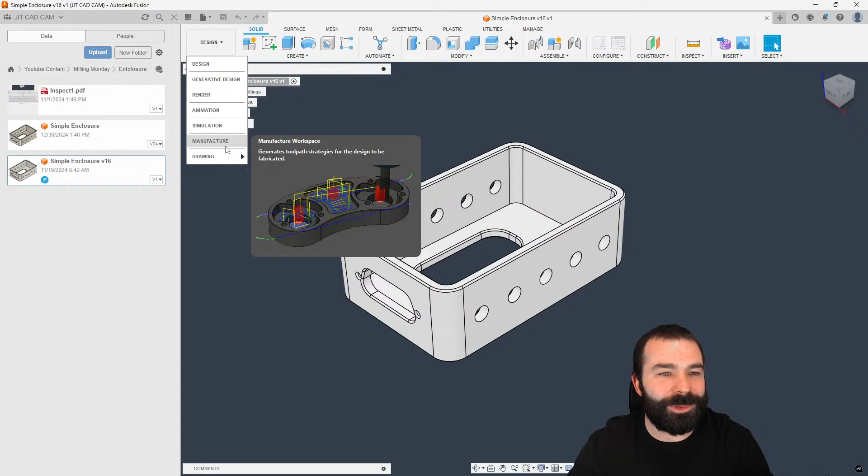Here we go. Now, question is numbering your tools when you're actually creating your tool path. So let's do a setup here real quick and throw a couple of tools at this. As always, we got to wait a moment.

First time I've started up Fusion's setup side of things. So let's give this some tool paths. And we're going to go with the good old standard.

So there's a couple of things I'll point out before I jump into this too far, Deep Thinker. And what that is, one is I built out a shop crib. And the shop crib is the way that I tell most people to go at the end of the day. Is you can have, of course, libraries of your machines, or you could have, again, a shop crib folder.

Now, I would recommend that you do the shop crib folder and then put another shop crib inside of it. Again, to me, it's easier to go and reference everything quickly based on those selections, of course.

But as you can see right now, if I go to my VF2, my face mill is in pocket 10. So based on that information, it makes it very easy for me to go out and grab these tools. As you can see here, I was very easily able to go in and face off this part.

If I go back in, let's hit this with an adaptive clearing now. I am just going to recycle the good old 1/2-inch end mill. And then as you guys are going to see, this is going to wrap up this part pretty quick.

Let's say we're going to do, I'm going to do this the wrong way, just so you guys can see, is 3D contour. Again, we're going to grab another tool. Let's say it's that 1/2-inch ball, right?

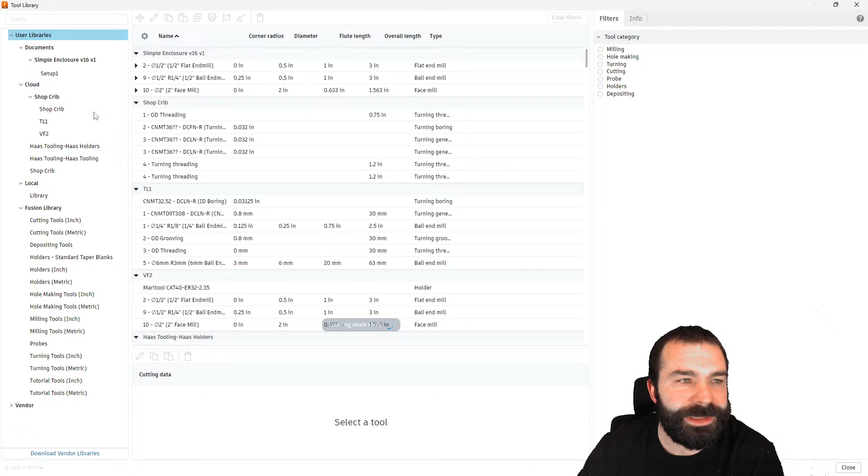So if I go to my tool library, up here at the top left, you'll see I'm currently working inside that enclosure file, where my setup tools reside. Now there's the ability to auto number your tools, and with auto numbering it shows you what it's changing from and to, similar to parameter settings. If I wanted to go up by 2s, or by 10 in this case, it automatically tells you how to renumber, but it uses a continuous one-after-another change, so it's a bit more manual if you want a specific tool number.

You have to come in, right click, and edit that specific tool. The good news is, a few weeks ago we talked about this with Autodesk, I can change the tool number here. Let's say we make this 19 now. I've only changed this inside this specific part file, because there's no linking between my tool pulled from my cloud library and the changes made at the part level. This is something I think Autodesk saw, though I don't know what they'll do with that information. As you're seeing, I have to manually come in and change this in my library, because I'd need to change it not only here but also at my VF2 machine. Or, if I want to keep track of everything, I can copy that tool, go to the VF2, and paste it back in so I have the latest version. Again, I'd have to go in and delete any other tools. This is why I prefer the shop crib method, or building a machine library.

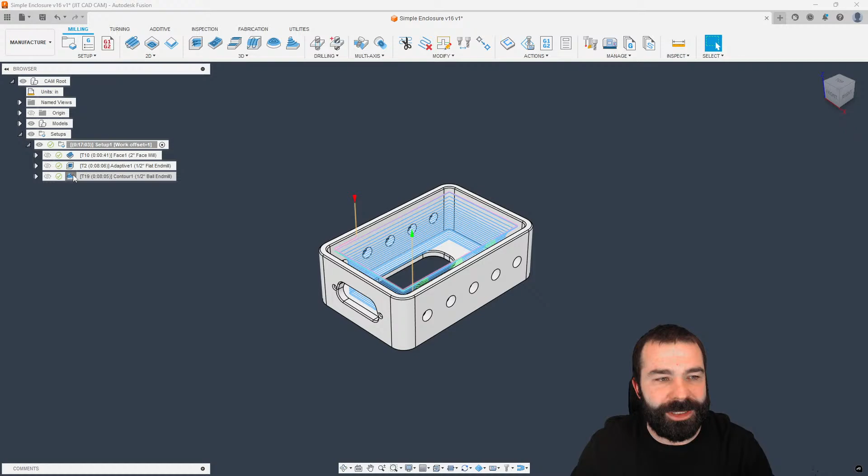Another way you could edit your tools is to go to that operation, right-click, edit tool, then jump over to post-processor. Let's bump this up to 29 now. What that's going to do, when we go into our tool library over here - sorry, tool library, not post library - is show that it's tool 29 at the file level. Again, it hasn't pushed back and updated anything in my standardized library. So there really is no good way to update tool numbers quickly. I don't know if you can do a compare and edit, but let's take a look.

As you'll see here, with tool number in the tool library, you can't actually update either with the compare and edit. This would be a good feature request for Autodesk - if there was a way to bulk update at this menu and push that information back and forth, that would be handy. But it could also get you in trouble if you changed from 29 back to 19, but the work offset 29 stays the same. So Deep Thinker, I hope that helps you out a little bit.

I'm going to go ahead and - or was that Deep Thinker? That was Deep Thinker. Awesome.

Deep Thinker, I hope this helps out a little bit on how to organize your libraries so you can have consumable or rotating tools versus your standardized tooling. Depending on your machines, I've always started to use - in the case of a Haas machine or a Fanuc, you have 200 tool offsets. I tend to always place the same tool in the same tool number, and then I have a standard 200 tool library, and I'll just swap out the pocket number at the machine to make it work.

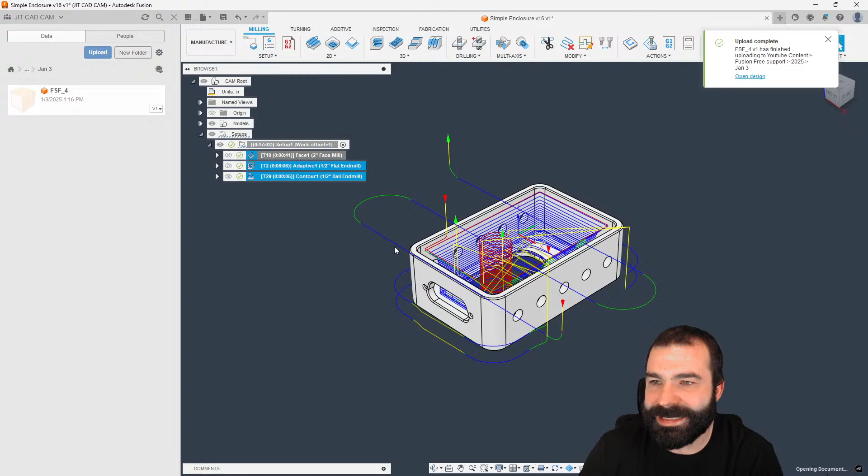So let's go ahead and get this file opened up and see what he's talking about. So I know he is using that lovely thing called millimeters, but we won't let that affect him too badly. But it looks like he's got a couple of surfaces. Are the purple surfaces or the orange surfaces you're looking to machine down?

Orange surfaces. So there's a couple of ways, and I have actually had to do molds like this a lot. The old school way of doing something like this would be if I go in and, let's say, I'm finishing up these floors with a scallop toolpath. So if I go 3D and I go to my scallop...

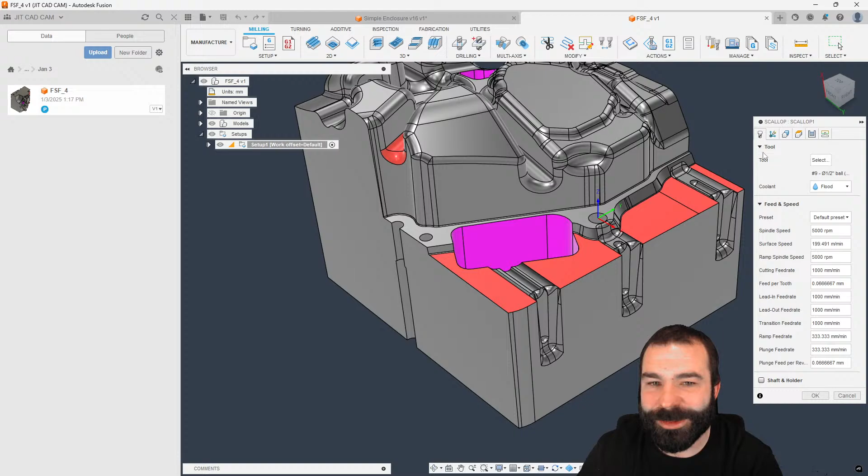Again, we're going to go grab my lovely ball end mill. Now, for a lot of you guys out there, millimeters versus inches really doesn't matter. I actually recently saw a really good video talking about that, because really you can program almost any machine in one or the other and your G code can be translated. We'll take a look at that here in a minute.

I'm just going to do this first landing, of course. And what we want is we always want to get a toolpath on our part, right? So 0.5 millimeters should be a pretty small amount. And as you can see now, we're machining on that surface. Yes, I know we're going up here on the top a little bit. We could, of course, fix that by changing our contact point boundary, things of that nature.

But if I wanted to machine that surface down, in his case 2 millimeters, I could go to stock to leave, and then based on my axial, I could say -2, while my radial stays at 0, right? So this is a cheap way. As you're going to see now, that toolpath has been dropped completely by 2 millimeters.

So again, we could change our containment, of course. We could fix this edge so that we don't touch that wall, all of that. But by using the stock to leave and dropping it by 2 millimeters, I've simply gone in and achieved what I wanted.

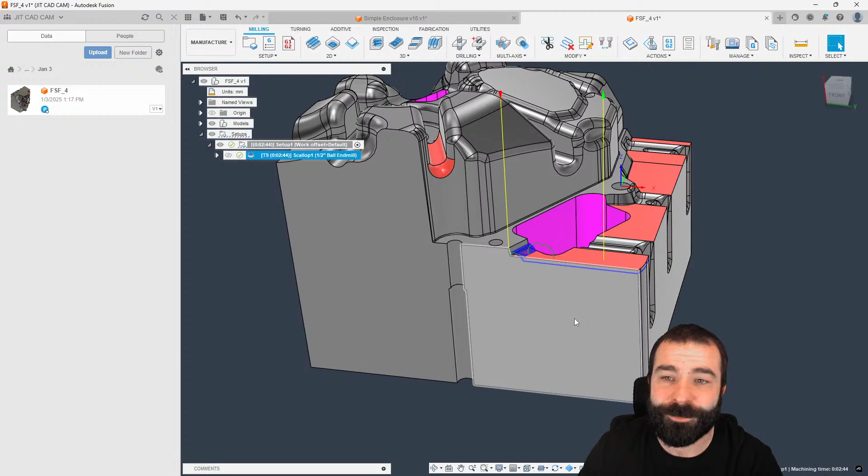Now, another way you guys could approach something like this is I'm going to go ahead and jump over to the design side of things. Now, this is an extremely complex surface, all the modeling that's happened here, so this may or may not work.

But what I'm going to do is copy and paste my body, and I'm going to leave it right where it sits. Yes, for anybody out there, setting this up with components would be your best friend. In this case, we're going to move a little quick here, but as you can see, I now have my 2 bodies. I don't have a timeline, so I want to make sure we turn on that timeline. And now I'm going to modify one of these.

Now, again, I can use something like the press pull tool, and this is where we're going to find out how well this is going to work. But as you're going to be able to see, if I pull down on that surface, I am getting that surface to move, and it is carrying that fillet with it.

Now my computer is locked up temporarily. The Fusion is doing some thinking on how it can reconstruct the surface, because the problem is going to rely on all these other surfaces working and being able to be repaired automatically, right?

So in the case of this part, as you can see, I was able to pull that down 2 millimeters. Now keep in mind, it is pulling down everything else with it, so I do have to be aware of that. So we're going to go ahead and hit OK.

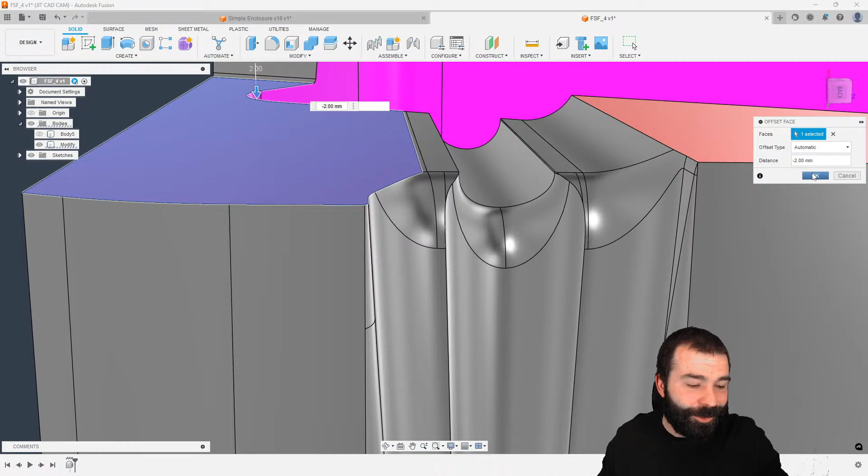To make our life easy, I'm going to compare those two bodies to see what works and what doesn't work. In the meantime, we're going to let Fusion think, because if there's any tip I could give anyone, it's that when it gets stuck like this, if you get click happy, you could actually crash the system and cause a lot of problems.

So it doesn't work on all surfaces, correct. With it not working on all surfaces, we'd actually have to do quite a bit of modeling. But as you're seeing here, I'm going to change the opacity. Now you guys can see I did get away with pulling one surface down so I could remove that area. So in some ways you can get away with something as simple as using that push-pull tool.

Now he's saying it's not necessarily going to work for all surfaces, which is true, which means we might have to take a more traditional approach where I could do something like an extrude and physically cut down that surface.

Another thing you could do that I think a lot of people overlook is you have the ability to go in and do a surface. So now I could go in and do an offset surface. For example, I want to use this area right here.

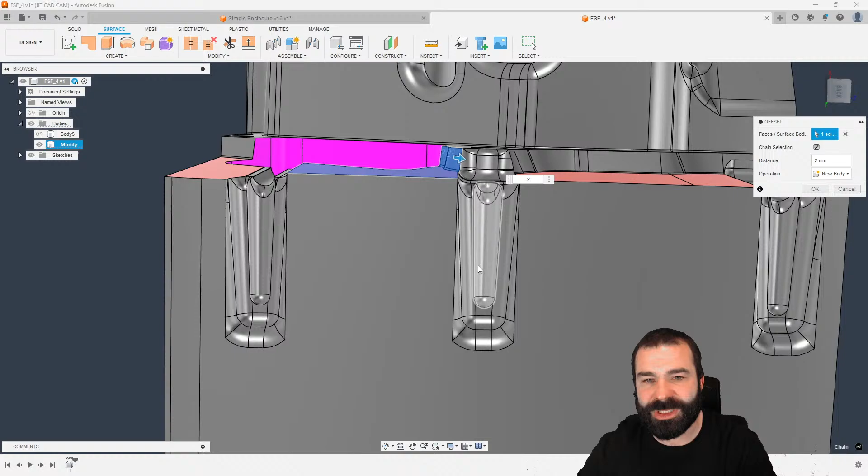Now notice how we're going to grab everything. So just being safe here, if I say -2, let's get this model out of the way. What you're seeing is that blue hue across my screen versus that surface that we've offset. Again, because we've taken all of those surfaces and they are chain selected, it's also doing that backside, which according to his coloring, he did not want to change, right?

So let's go back and do that offset surface again. This time we turn off chaining. I grab that surface, and again I can pull it down by -2. If I get my model out of the way, you guys can see where I'm pulling that down very easily and moving it.

Now there are a few other ways you can get away with this, and again I just want to get this to a point where you guys can see what's going on in the background. There we go. So you can see I created that offset surface. I pulled it down, and again it's going to create a shell expanding in both X, Y, and Z from that surface.

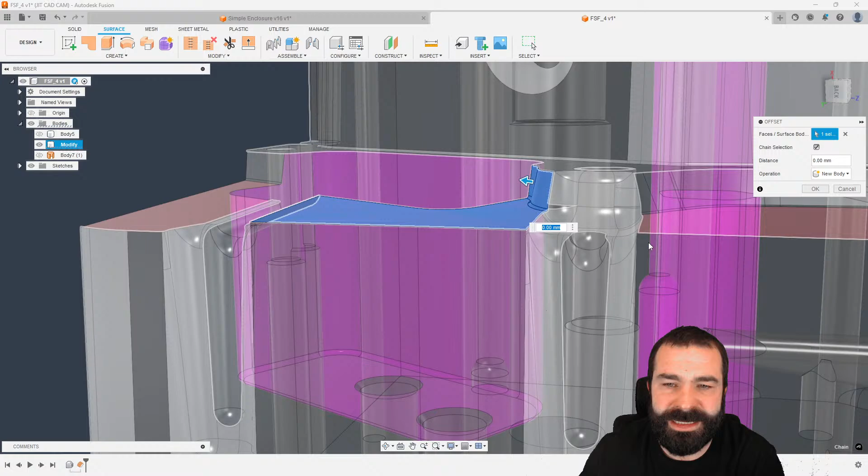Now another way you could use offset surface is you have the ability to do an offset of 0. So if I grab all of these surfaces, in this case I'm going to leave them at 0, and then I could do a move, and move that based on my Z-axis down -2, or whatever he's trying to achieve, right?

So again, as you're seeing, I'm taking everything down with it for machining purposes. Again, I do still have a little bit of an issue here where based on the boundary I'm working with, he wants to drop everything. I assume you're trying to drop everything down and out to continue to follow these surfaces, right?

I'll give you a second to answer. But again, we could do quite a bit with these tools as you guys are seeing here. So if I go back one more time, offset this whole thing as is, I'm going to turn off the body. And now we might actually just try to reconstruct some of this stuff, right?

So this is where we would use something like unstitch everything. Again, we can now do something like an extend. I want to extend certain edges down a certain amount. Again, this is just a completely different workflow than I think some people think of inside the software, right?

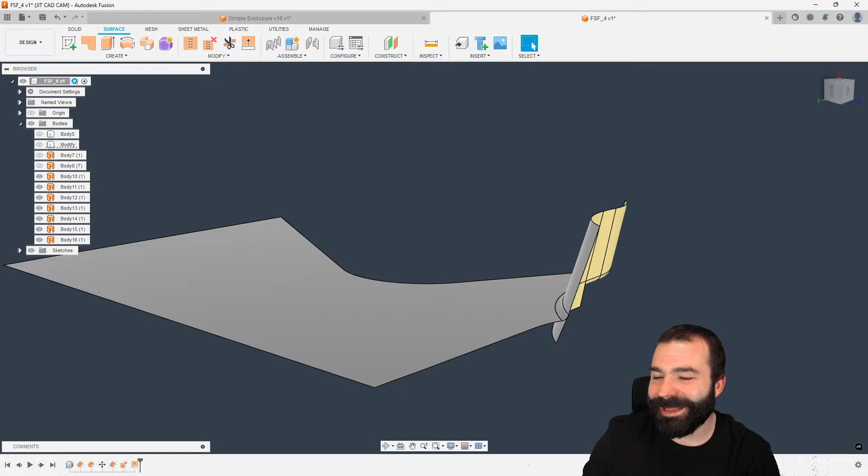Yeah, right. So I mean, I know what happened. Somebody either smashed this mold or somebody called in the ability to go and modify it, right? But as you're seeing, using surface tools, you have some different things going on where you can continue to take those shapes and modify them.

And again, extend surfaces. So even though I did all of this pointless work, as I'm pretty sure he said in chat, we could take this and machine it down, not so much worry about these other areas because it's all going to get welded back up. And then I assume he's going to remachine it back to zero. So it's still the same outcome.

I would say the easiest way, if you can get away with it, is the ability to use stock to leave. And what you're seeing is this toolpath sits on the part right now because we have the original part turned off, and now you guys can see that toolpath.

But using stock to leave could be your best friend, very much so, if you're just trying to get something out of here. I do have some content I'm going to do at a later date based on casting type scenarios, but it's still back to the same, so you guys know you can see how I have two different models playing around here.

So if you were doing a casting, or want a little sneak peek, let's say for example my part that we're machining here is actually going to be that modified part. And now my stock is going to be based on a solid, which is that original part. Now I would have two models, right? One would be the casting, one would be the manufactured part.

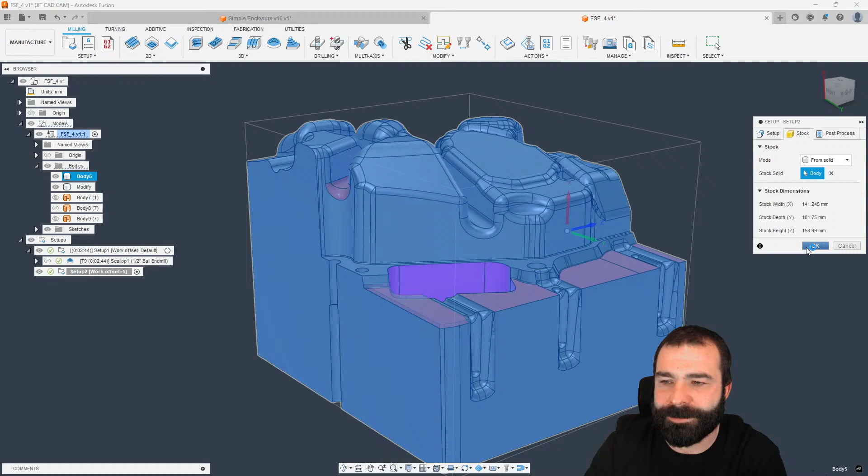But since we've set that up now, this little corner here has become my stock. And since it's my stock, if you were to go into your 3D toolpaths and do something like adaptive clearing, the rest machining is going to pick up on remaining stock, also previous operations. You could also do something based on a from-setup-stock scenario.

So again, let's go out and use standard tools on a metric part. Nothing's going to make the machining world hate me more than this today, right? But again, based on the rest machining settings of your Fusion and how you use them, it will auto recognize where it can and cannot machine.

It's thinking long and hard about this, so we'll give this a few minutes to think about what it needs to do. And in this case, I got an error message. Always, of course. Let's go ahead and change that rest machining setting. We're going to go from setup stock and let's see if it gets us what we need.

But as you're going to be able to see, we're going to get that two model comparison. Again, what needs to be machined versus what is machined, type of scenario. In the meantime, I see a few other questions come in while this is loading.

Fanuc mill post. Change the tool call out. Okay, so you want tool change to be T1 M6 in brackets, and then you want N30. Is the N numbers what your post is giving you? So you would like the tool number M6, and then the next tool call out to be also in brackets, as I'm seeing.

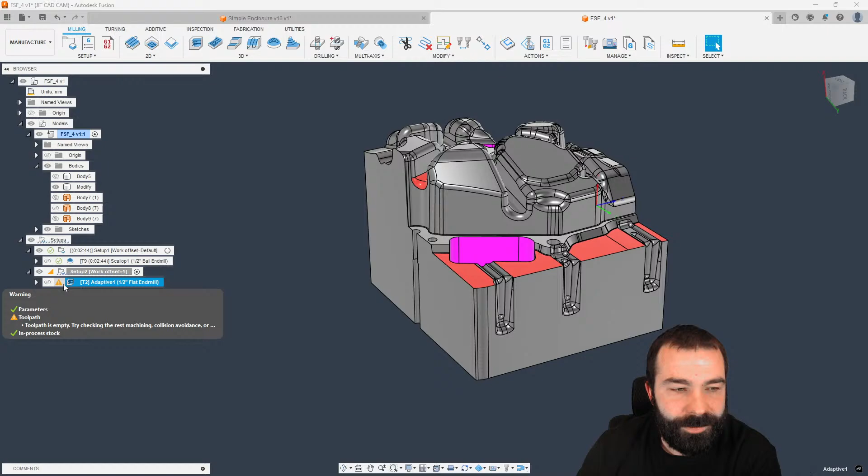Collision avoidance getting us, as always. Let's go ahead and see what's going on. I need to get an idea of how big that tool is in comparison to my part, right? Let's go ahead and show tool. There's my tool. Obviously we're not going to be able to machine on the right.

Hey guys, there we go. Screw up number 2. That deserves a drink, right? We need a tally board.

I swear, hold on, I'm going to scroll down. All right, so nobody in chat was out there hassling me that I had my Z-axis the wrong way. So in some ways I'm glad you guys didn't recognize it, and I did. In other ways, bad on you guys for not helping me out here.

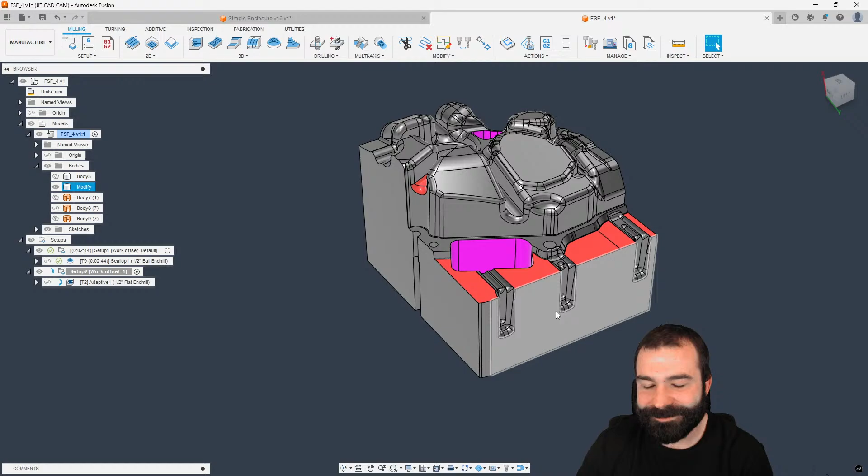Let's see if we get that toolpath to work right this time. We're going to go ahead and regenerate one more time while that sits. And we're going to go ahead and need a Fanuc mill post. Sure thing.

Mads Camper out there, and you know what we can do? I can pull this up at the same time.

I'm just pulling out a Fanuc post from online so that we can make those changes. Fusion is still thinking, so let's go ahead and pull up Visual Studio Code.

And Mads Camper, are you still out there? I want to make sure I'm understanding the way you want this modified. It looks like you want M6 in brackets and then the T3 in brackets for the pre-call.

So what I'm going to do is, one, I have my Fanuc post opened up. You want to make sure that you have the Autodesk Fusion Post Processor Utility installed. This will help you a lot with changes. What it allows you to do is go in and do a CNC selection. In this case, this is for milling.

And I am just going to go to what's called tool change, right? And the reason why I'm using tool change is because, as you can see, I'm now getting that T1 M6 on line 30. And then I'm getting my T2 callout on N35, as he's put in chat for you guys to see. So what I'm going to do is click, and what you're seeing is it's write tool call, tool, comma, insert tool call. So that insert tool call is the actual M6 in this case.

So if testing that, what I'm going to do is delete insert tool call. I'm going to hit Control S. And what you're noticing is it's now got rid of it altogether. So yours truly has actually removed the entire tool call. So I'm going to undo what we've done and hit save. And as you're going to see, it's come back now.

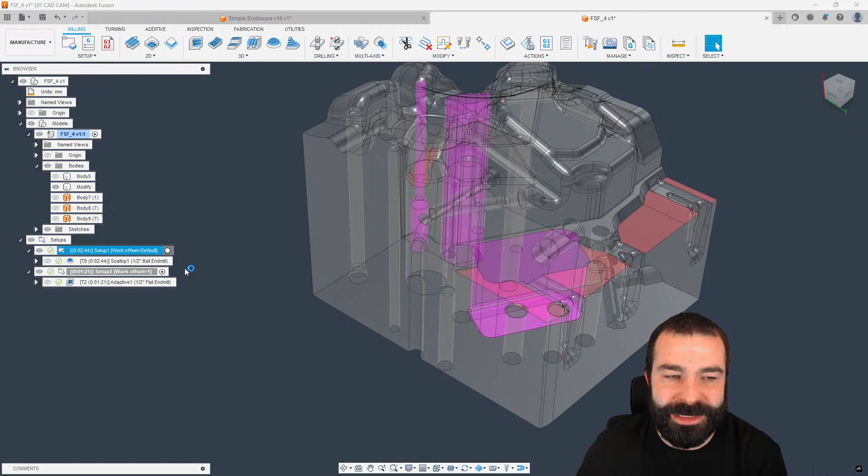Cool. So we can stay with this part in this case. We're going to go ahead and set up to do our inspection routine. First, I'm going to jump back to design real quick and change my opacity.

Here's a pro tip for you. Can you change opacity in manufacture? No, you cannot. That's kind of painful.

It'd be nice, right? So let's do an inspection. And what he's asking about is the import inspection results, right? So what I'm going to do is, what we need to do before we import results, we need to create inspection results. Well, your inspection results can be a couple of different things.

Now, you have what's called probe geometry, which is an in-process inspection. Again, tight tolerance bores, maybe keyways, things like that, right? I like to think of it as a single feature kind of probing routine.

Now, inspect surface is the one that we're looking at that's going to give you a much deeper inspection upon your part, right? So I say it's comparable to a CMM, but for all of you out there, before you hassle me, it's not going to give you GD&T data.

However, bullet point here, Autodesk, can we get it to do GD&T data? Please, it would be amazing, right?

So let's go out and get our probe. This is the one tool I think that is in my machine that is metric, because it has a 6mm jewel on it, as all these guys are going to hassle us about. But what I need to do is I need to set my points to actually measure, right?

So now this is a good example. Let's say, for example, Bogdan is going to machine this part, right? And he may have actually forgot about surface here, or he's over machined the surface. Now, you can go in and you can set your tolerancing of those surfaces.

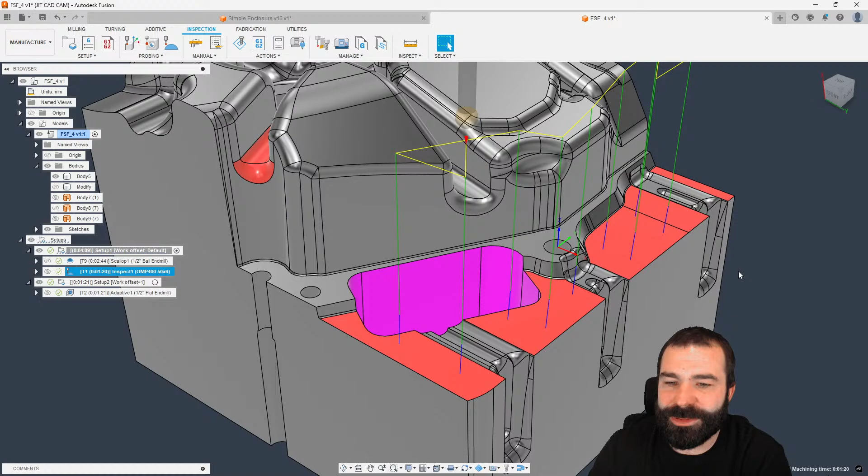So what I'm going to do is I'm now going to generate this inspection results. Normally, you would post this out and you would go run this on your machine. So I think I have to do some post here. Awesome, we post this out.

It's failed, of course. Why did it fail? Work coordinates 0. Okay, got to fix that real quick.

We're going to go ahead and make sure I never do this again. I recommend everybody does this. Set this to 1 and then go ahead and right click, save as user default. Now, every time you make a setup, it'll always start with 1.

But let's go ahead and post this out. So I'm posting this out to show you guys what your machine would want to run. Probe on command, of course, because FANUC needs probe on and probe off. We're going to go ahead and switch out to a Haas post.

But let's go ahead and let's see here. Actually, probing and inspection - we'll have to fix that later. This was a post I was doing some testing on. So we have our, let's go to the default library, as you guys know.

Haas inspection, right? We don't want pre-NGC, next gen control inspect surface. So one thing is you want to make sure that you're getting a post with the inspection capabilities and the inspect surface. This will be very handy for you at the end of the day.

So we're going to base this in the free support Friday. Don't use post library because this is where I usually butcher things. Let's go ahead and post out now what should be known good G code. So this is the way the actual Haas post is going to spit this out. But what it's doing is it's deprinting, sending things to the parameters, writing things to a file if you're doing so. This is the code to run the machine, right? And what it's doing is plotting points. That's all it's doing. It's not real crazy at the end of the day.

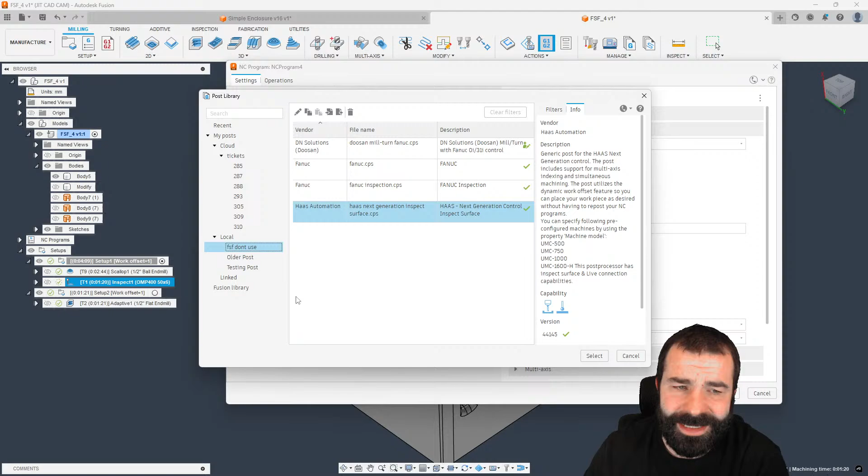But if I go ahead and come back and post this a second time, and everybody has access to this, I don't know about the hobbyist license, but there's actually a post for generating inspection results, right? Now what you're seeing is I'm going to the Autodesk library of posts, and then you'll see there's a results file generator for probing, right? And what this is going to do is generate results based on a deviation, right?

So what we're going to do is go ahead and hit post. This file, got to make this clear to you guys, is the file that your machine would have created, right? So I've shown you the G code to take to the machine. This is actually the G code you're going to remove from the machine, right? So these are all the points that we've actually plotted in space on our part, right?

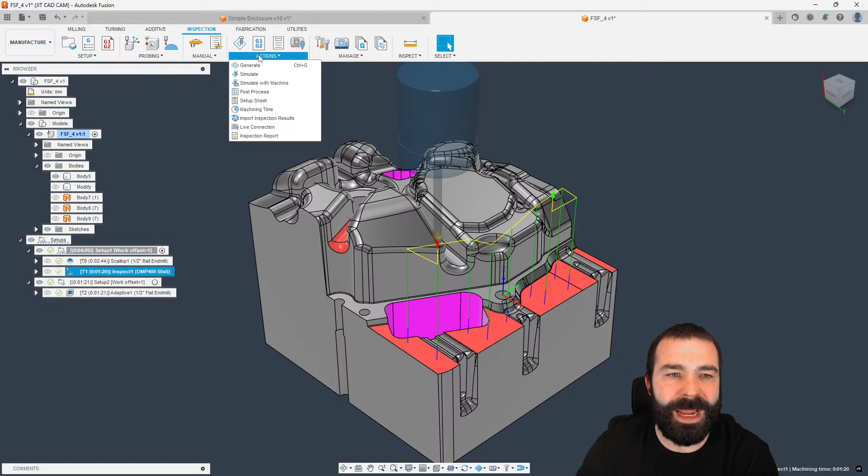So with that, I need to import those inspection results. We're going to go ahead and go to inspection now. I'm going to do my action, and we're going to hit import inspection results. Now I need to select that file that we've generated, which means I need to go chase down where that file is. I believe it fell under NC program.

Let's see here. We might have to repost it to somewhere where I know where it is. Let's do that one more time. Post process. Let's just put it on my desktop so it's easier to grab, right? There we go. There's our results.

Import inspection results. Again, guys, I can't stress this enough. One, you could do this if you have the post that's in the default library, but two, this is the file you would pull from your machine, right? So what you're seeing here, before I go through and start messing with anything, is this is the results. This is what we got back, right? So as you're seeing, all of those surfaces are considered good.

Now they're considered good because of the settings of that post I used to make the results. But you can now validate and see those results, see how much you're deviating. What is the deviation? What is the problem with those actual points in space, right?

So you could also create what's called an inspection report if your customer is looking for something. Again, this inspect surface is the key element when you go in and actually do anything from here, like part alignment, stuff of that nature, right? So as you're seeing here as I'm pulling up the inspection report, again, that inspection report is going to be a view capture of what you were looking at when you created it, as well as a list of all those data points for your customer.

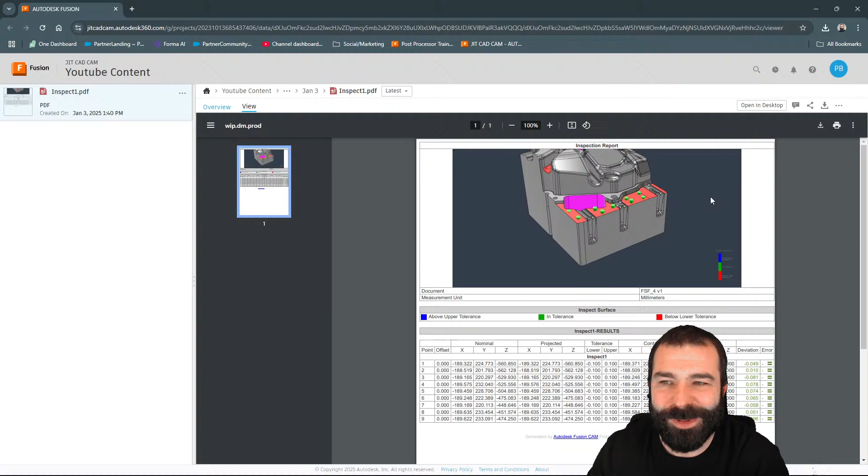Now, again, since we've actually done that inspection, we have that ability to do a part alignment as well. So if we wanted to do a part alignment, we need results. We've already created those results, right? So I can go ahead and bring in those results right here. And what I'm going to do is hit OK. And what this is going to do is now generate an alignment, right?

So we've already posted for alignment, which means you would post G code. We can then import our inspection results. We've already done that. We can show the alignment information, which means it's going to transform or shift our part. These are all in millimeters, guys. And it's going to rotate all of our G code.

So it's adjusting the G code to the part. That's the thing I think a lot of people don't understand - part alignment is adjusting the G code. It's not doing a plane shift at the controller. It's not moving the planes or anything there. We're doing that all with the G code coming out of Fusion.

So what this would mean is what would normally be a straight line in X is now an angular line in X, Y - technically it's only in the YZ plane that it shifted, right? So when that G code comes out, it's going to look night and day difference. But once you get those inspection results imported, there's a lot of things you can do with it.

I do see Discord just jumped up. I see one of our all-time viewers, Travis, is sending me a photo. I kind of see what he's going for now that he's talked about it. He was asking about threading and clocking threads inside of Fusion, which is a little tricky, but let me get back over here so I can see you guys in chat. Travis is finally here, yeah I see that Travis. Does anybody else have any other questions in the meantime? I do see my phone is also going off with notifications.

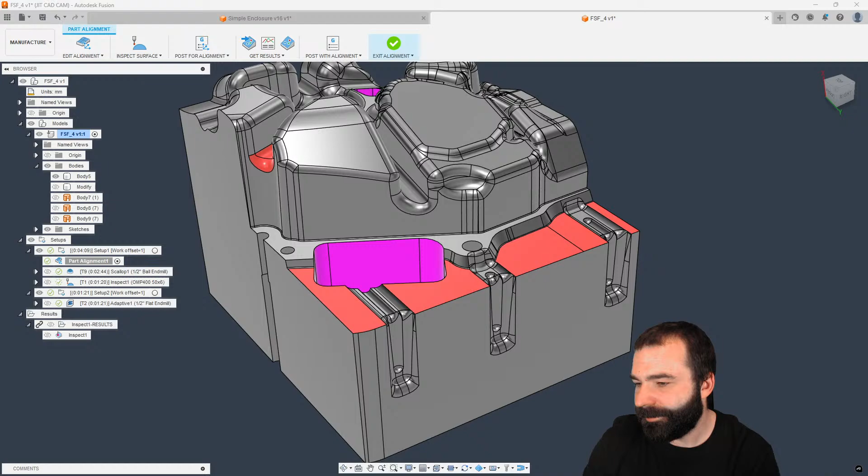So Travis was asking about clocking his thread, but I assume it's the starting of the first thread is what he's asking about, right Travis? Where and how can you define the start of the first thread inside of Fusion? Guess I should pull up my chat so I can make sure I know everybody's out there.

So he's doing this with milling. I'm going to go ahead and just create a simple part for doing this. Actually, I think we have something that'll work here, right? Go ahead and flip our Z, angle all my tool paths. Oh, do that one more time. Flip it back the other way. There we go.

And we sure don't need 3D on the outside of this part. So I just did this to rough out the part for stock purposes.

So what I'm going to do is I'm going to do a 2D thread cycle. Now there is what's called a start angle, and this is where you would need to define where that's going to be based on the part. So I'm going to give this a very generic little thread mill. I don't think there is a default thread mill, is there?

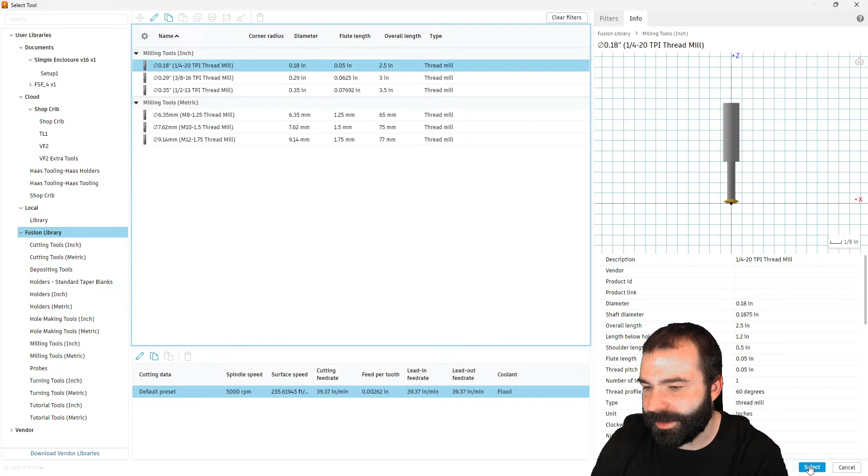Where is it, thread mill. Tiny little guy, 1/4-20, right? Perfect, surface that we're going to machine. And so what you're seeing right now is we are currently starting over here on the left as we do our milling in and out of this part.

I see something about a copy and paste. Do it with a copy and paste of thread. I was curious how to do it with milling. Maybe I don't fully understand your question, Travis.

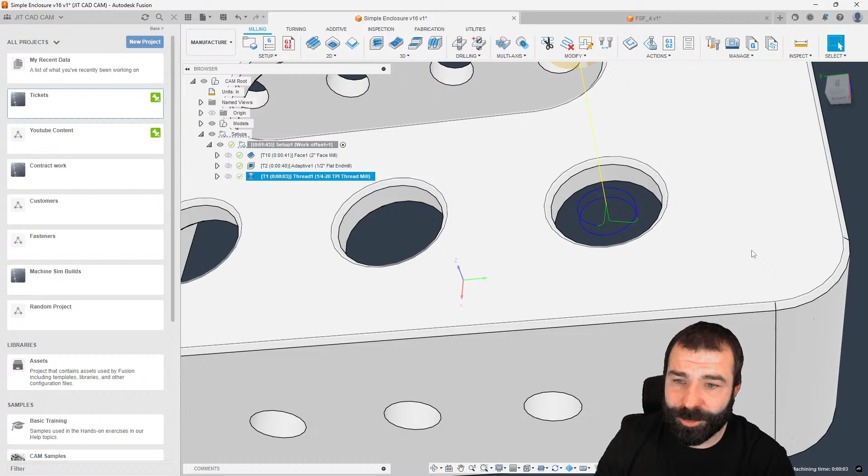As you can see, I can clock that thread start by using my start angle to adjust it, right? So again, as when we were at 0, we're at 120. As you can see, we could rotate that around in any way, shape, or form. Now you could also do things like multiple threads here if you guys didn't know, which means we're going to do a double lead thread.

Ah, I see. Okay, so you're talking about... Okay.

So what Travis is referring to—I'll need a lathe part for this, of course—is he's trying to do thread chasing with a live tool after he's gone in and done something with a turning tool, as if he sent a part to heat treating, right?

So there's no real good way to do this in Fusion as it sits at this day. Now, if you knew where your threads were starting on a part, you could obviously get away with some things. But here's my part, again we have our inside type work. What he's referring to is if he was doing inside threading. I think I have a threading tool up—ID threading, OD threading, ID grooving. I'd have to make an ID threading tool here real quick.

That's all right, we could throw one together. Thread... where is it here? My brain's just not working. Jumping back from mill into lathe all the time gets me every time.

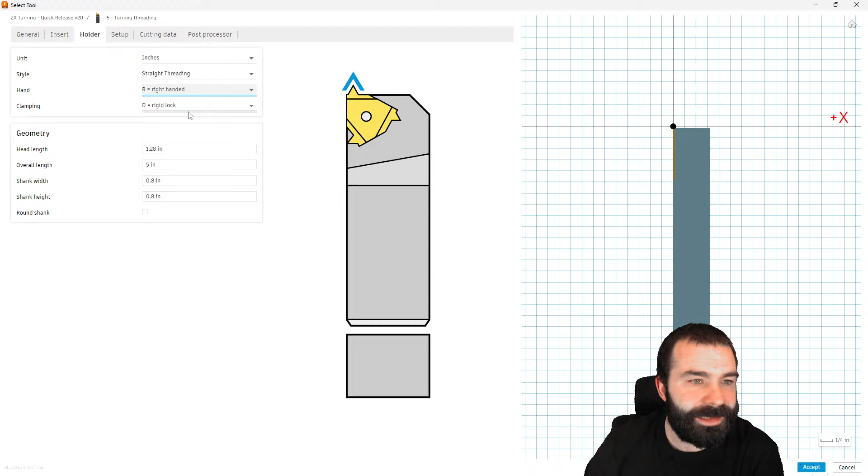Right-handed, straight threading, inch. Where is the—am I thinking wrong? Inside versus outside?

Yeah, I know, I keep telling you guys got to give me content for the mill turn Thursdays. Am I? There it is. Internal thread—see, I'm not crazy. Thought I was crazy. I'm not crazy.

Yeah, we got to fix that tool. I broke that pretty badly.

Head length is going to be 1. Am I also doing this wrong? Somebody tell me. Wouldn't surprise me anymore, I do a lot of things wrong. Yeah, I did it quite wrong.

Yours truly's tool is way too much. I've come accustomed to you guys making fun of me all the time.

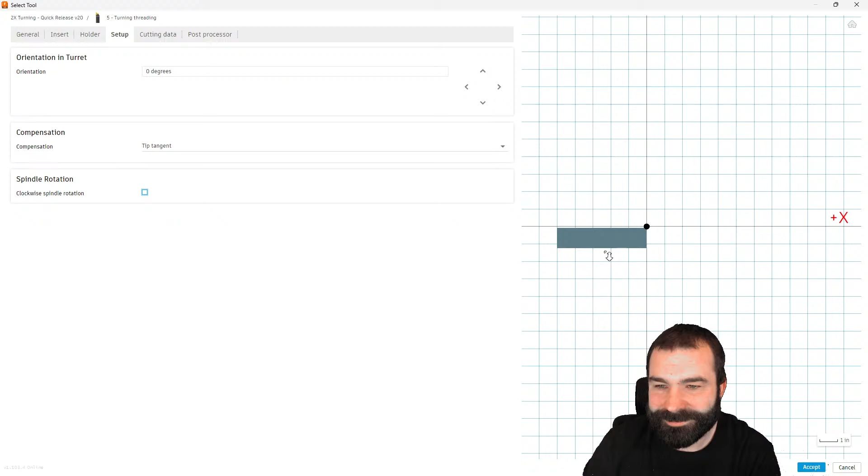That is not going to do it. Nope. Oh man. When in doubt, something else, right?

Can you switch? Still able to switch from one to the other? But I'm surprised that doesn't just instantly toggle from one to the other. Kind of crazy.

All right, threading, inch, rectangular profile, triangle—doesn't really matter. Yeah, that's what I did before. I was trying to figure that out, but it's not doing it as a... there we go, that's... see?

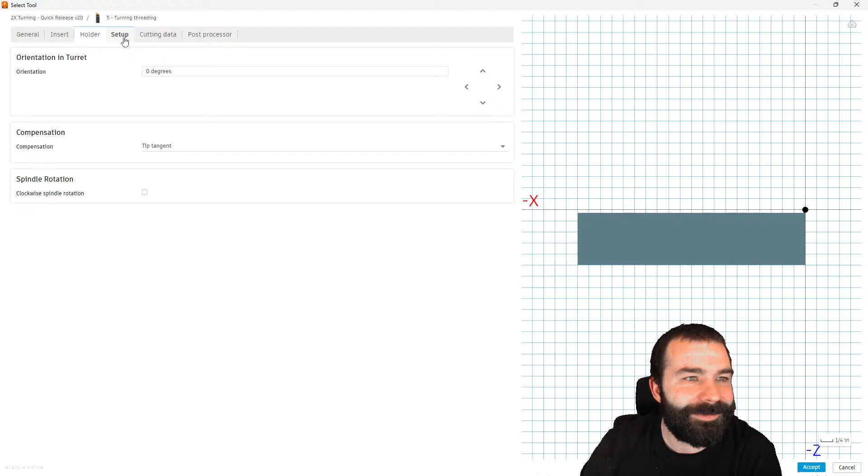That's why Travis gets paid big bucks, guys. The problem is the operator, right? So in your holder, you must change it to internal threading to make an internal threading tool, right? That would make more sense. But now the question is why do we have our tool facing down? See here.

Threading... yeah, it is definitely a short between the operator and the machine. Ah, Autodesk, fix this, please. Oh, you know what it is? It's because somebody went in here, I think, and did a bunch of wild stuff.

Nope, not so much, we're going to go with the insert, triangle. Look how really messed up it looks. Let's go, we're going to break it—we're going to break it hard, right?

I'm missing something, I'm missing something easy. I just don't know what it is off the top of my head. Somebody out there is going to say something here. Hopefully.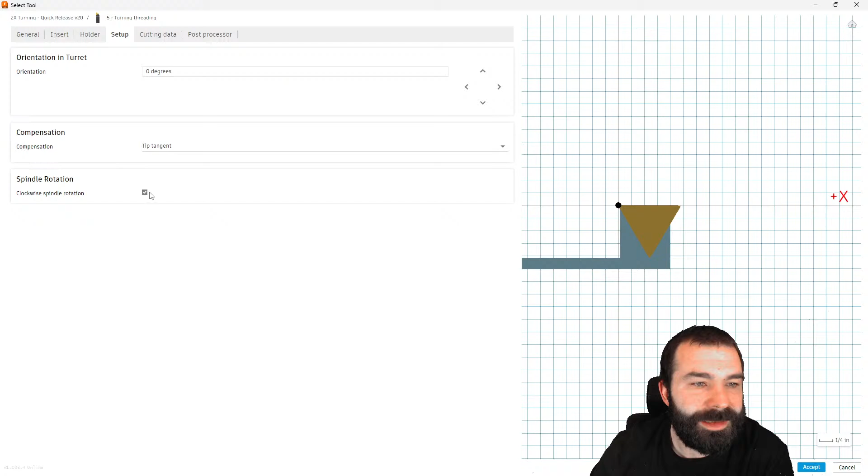Internal threading, I mean right-handed or neutral wouldn't make a difference. You'll send a pic in Discord. Yeah, am I doing something way wrong, Travis?

What is profile 60? Sure, doesn't really matter. I feel like this isn't on me for once. Although it could be.

Oh, you know what? It is on me. Look at that. Right? Something like that, technically. And shouldn't it be something like this too? It's just that head of that tool is so massive. Where is tolerance?

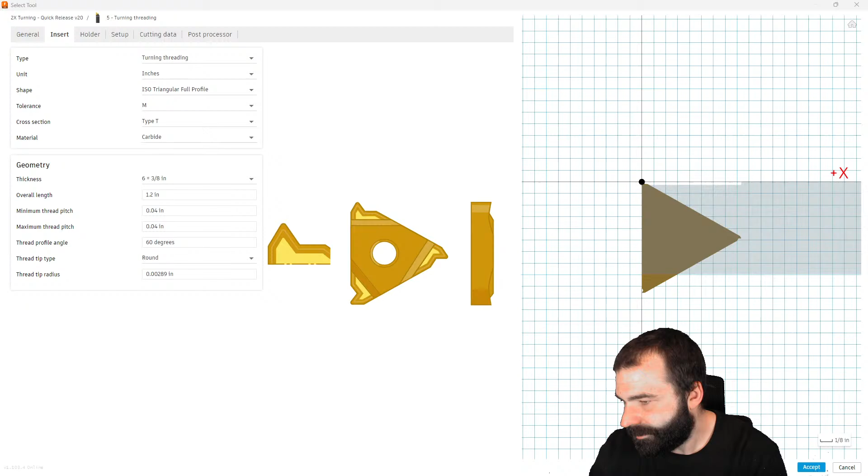All right, let me pull up Discord here. How is...

There we go, oh it's funny—you send me that screenshot and your first thing is units. How am I getting something different? That's funny.

I have type. We're just having nothing but problems. Welcome to the show, guys. Welcome to the show.

That's what I wanted, to change overall length. Here we go. That's it, we're calling it. Show's over.

Hey, we got an internal threading tool. It only took forever, right? And now we're doing inside threading.

All right, thread face... here. Not supported—let's go. I can't win, you guys see this, right?

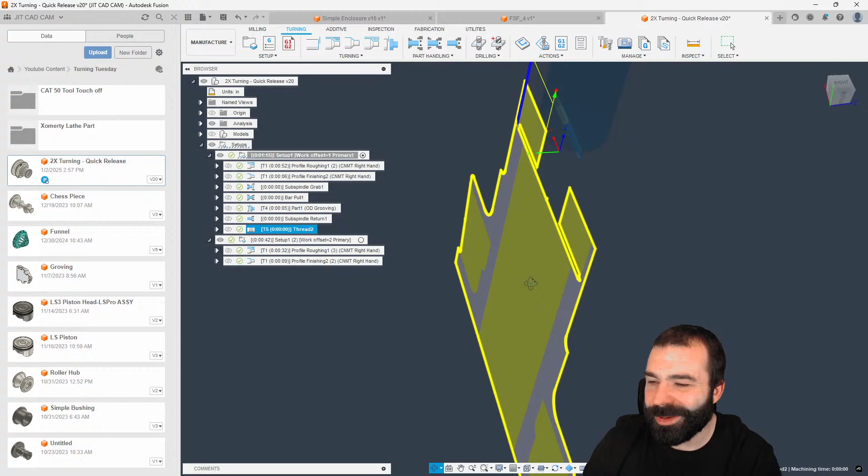So knowing that exact entry point here, also knowing that exact entry point when we talk about doing thread milling, right? So if I went back and I actually stole that other tool path, am I right in my assumption that you're doing something with like heat treat, Travis?

So as you can see, this is where we start and where it engages in the part. This part is spinning, so although it's engaging in the x-axis here, it might actually be engaging at like a 3 o'clock or 12 o'clock type of position - 12 o'clock, 1 o'clock, 0 o'clock.

But matching now the thread milling that chases after the fact, right? So, of course, we should make sure our pitch is the same. Let's say this is 0.05, which is a quarter 20, which is the same here, which is now our thread pitch, 0.05.

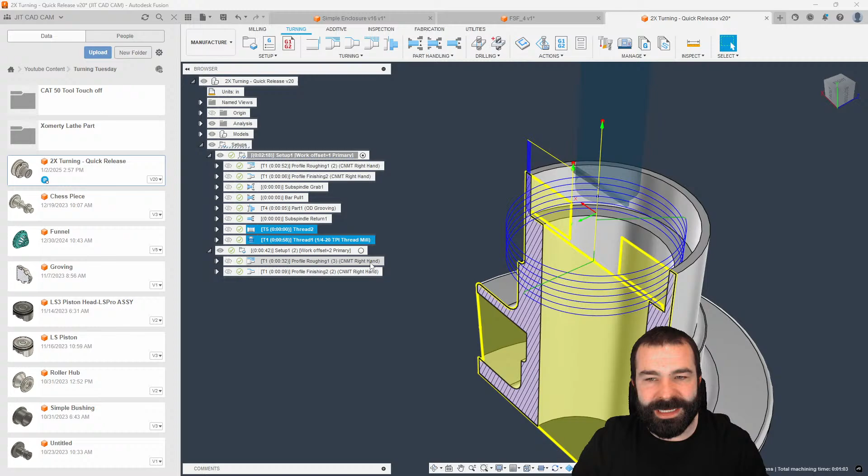But the real issue comes down to, and this simulation is going to look terrible, so give me a quick second here.

It's not necessarily going to match up the way it should from one to the other, right? Maybe we'll bore this out or make this out of tubing, right? Size 2. Beautiful. And then we are just going to hit this with an inside boring path, not take 47 minutes to set everything up.

Selection. Selection. I don't know, 40 for back off. There we go. Just trying to give you guys the best content possible out there.

So what we're going to do is we're going to simulate this now. You guys are going to see we're going to rough this out. Now we can see nice clean threads with that threading tool, of course. And what I'm going to do is turn that model off again.

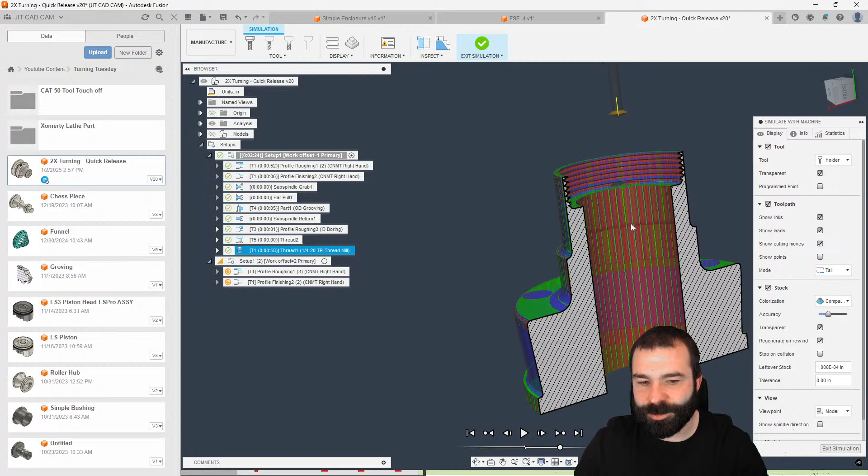But like we said, the problem still happens when we come in now to do our next toolpath, which will be this thread mill, is where he is engaging with that thread mill versus the actual threads that have been created, right? As you're seeing, as we're starting to come around, it might be a little crazy to see. Let's go ahead and flip out of comparison to operation. But as you're seeing that thread mill work its way around, although it's doing the right threads per inch, the problem is right off the start, as you're seeing, is where this is lining up.

I know it's not far enough out for you guys, but we're not lining up at the correct Z height between this path and this path, which is what Travis is fighting, right? So the real issue is when he goes in to thread mill this, everything is coming out all wonky and it's not lining up perfectly, right?

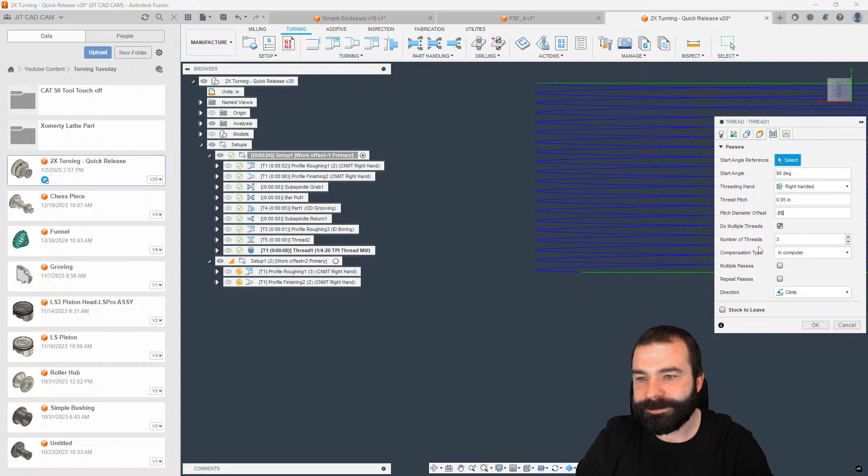So again, looking at that when we simulate it, the real problem is there's no clean way in Fusion at the end of the day to go through and actually set from his case. Again, like we said, he went off, had something heat treated, and then came back after the fact, and he wanted to remachine those surfaces, right?

What you're seeing happen now is we're actually doing those multiple threads. Let's jump to our next tool. And now you're seeing 3 threads. Again, terrible pitch and everything here.

But what we're looking for is how do we get these guys to all align each and every time, right? So when we're looking at this, back this up a little bit, give it a sec to regenerate, that thread point is not aligned with our other threads that are inside this part. And he probably had flats or something to clock this and hold on to it very well.

But yeah, he would have to adjust, in this case, his bottom height or his top height to change the way this is going to work at the end of the day to get it to align. Any other questions outside of that?

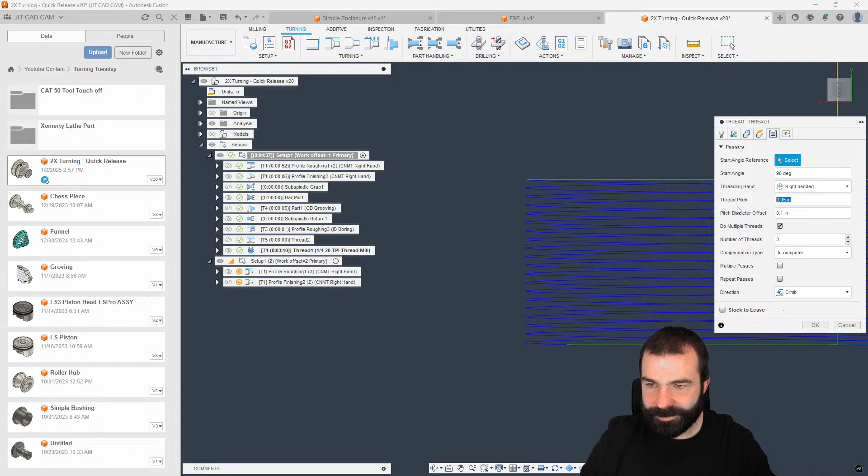Dylan's still out there. Great to see you guys. Maybe it's time for me to take a bathroom break. I've been super worked up, going like crazy.

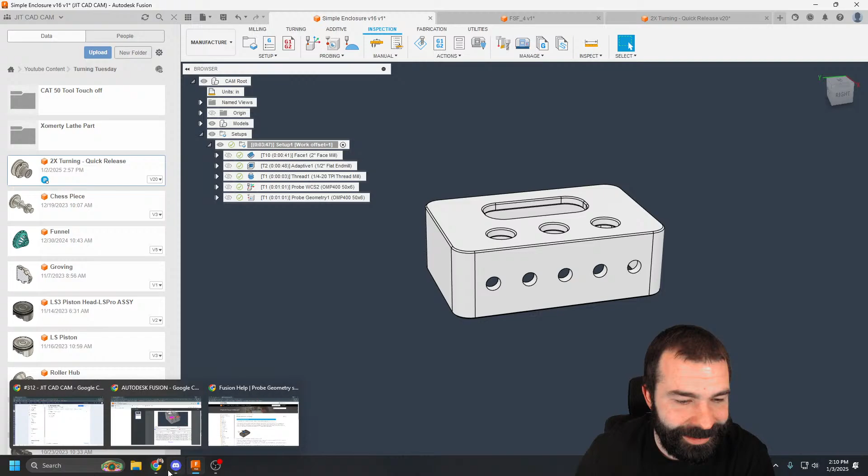I'm missing something. I forgot to change screens. Yeah, I'm missing that. All right. Oh, all right. Is that really all they added? Hold on, I'll come back to this, guys. Probe geometry. I think that's all they added. I think I hyped this up way too much.

So I found it. At first I did probe WCS, and then you know how you have this lovely model versus stock right here for probing WCS? Well, they decided to add that to probe geometry now. Surprise! There you go, there it is. You can now do... before you had to do model, and then a stock model, I guess, but...

So then, did they make it... let's see something here, let's get into this. Let's break it. So what happens if my stock is a model? Huh? Anybody know?

Find out. Because before you had to do the whole... you know what, I should do this a way cooler way. You guys want to see a way cooler way? Check this out.

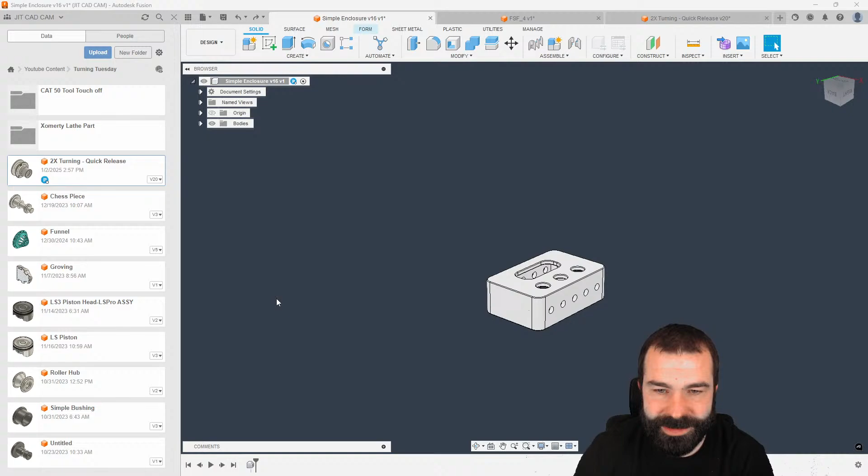When you're in design and you have your timeline on, right, capture design history, you could go to modify now, and you can go to simplify, and we could say replace with primitive. Okay, and now look at that. Automatically makes a box for you. The problem with this, though, one, you don't get the control of like symmetrical or this way or that way or anything like that.

The other thing is what it's going to do is take this body and it's going to convert it into a primitive. Watch. Now my body is not a part, it is just a box, right? Autodesk, bullet point: can you make it so it creates a new body?

That would be amazing. Or when you go in and you do simplify like this, I love that I can give it a different size, right? It does look like it stays on center, which is nice, right? So like if you really wanted to use this to the advantage, but now what you're seeing is I'm dead center with that part, right? I'm not offsetting one side versus the other side. I'm just making a bigger box in all directions.

It'd be cool if this tool had a little bit more technology where it was aimed at guys like me in manufacturing, and then I could say create new body, right? That would be so neat. But nope, I got to copy and paste, and then I got to break the first one, right? That's how we're going to do this.

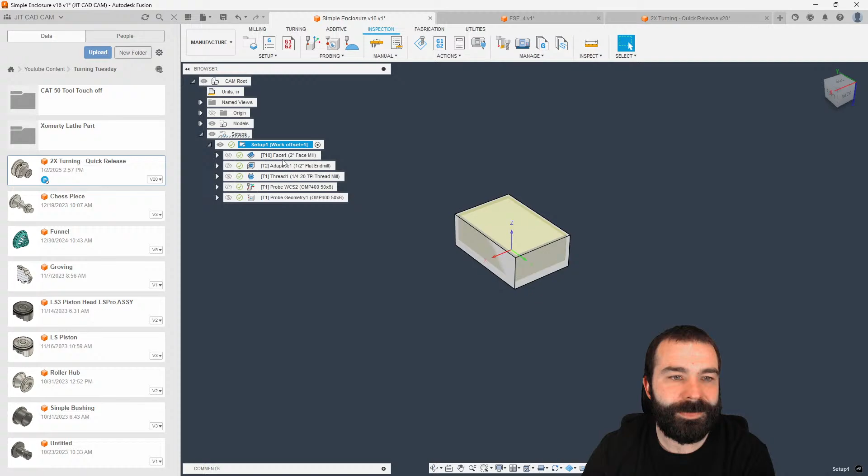All right, simplify, replace this guy. Let's say we go 2.25, 3.25, and then, I don't know, 1.25. Now I have a simplified primitive, and I still have my part. See? Fancy, right? But what I'm referring to is if I went in and I said from solid, right?

Got a from bounding solid. That's kind of neat. How's that one work? You guys use this one yet? Yeah, you can't just... man, some of this stuff makes me wonder. Let's go solid, right? And then that simplified primitive is now my solid, which is now gone.

But if I wanted to do probe geometry of stock, this is the problem. This is another issue that I see. I want to probe my stock, right? Well, let's turn on my stock. I can't pick my stock, right? You guys seen this? I have to say model, but I'm not probing my model that I'm machining. I'm probing a model. As well, I'm not able to pick my stock surfaces.

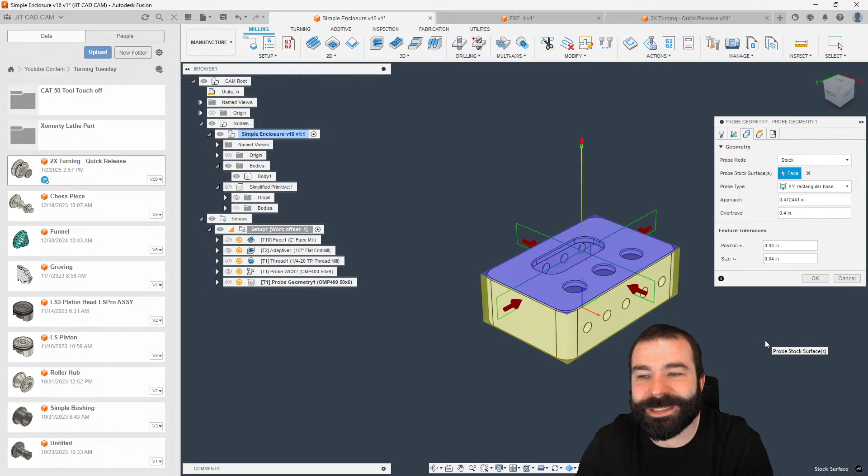But if you don't use a from solid, right, we'll go back to the old fixed size box, then, and only then, when you pick a stock surface, again, that surface is based on the stock being generated in the background. Why can't it all work the same, right? Like if I pick a body as my stock, it should always be able to pick that solid, right? That's just my take on it.

Let's go back and play with some other stuff now. What is from bounding solid? You guys seen this one yet? Select bounding solid. Do we look it up? You could always look it up, right? That wasn't in the list. Are we missing it?

Solids from surface. Oh.

Maybe I have something that I'm not supposed to have. What do you guys think?

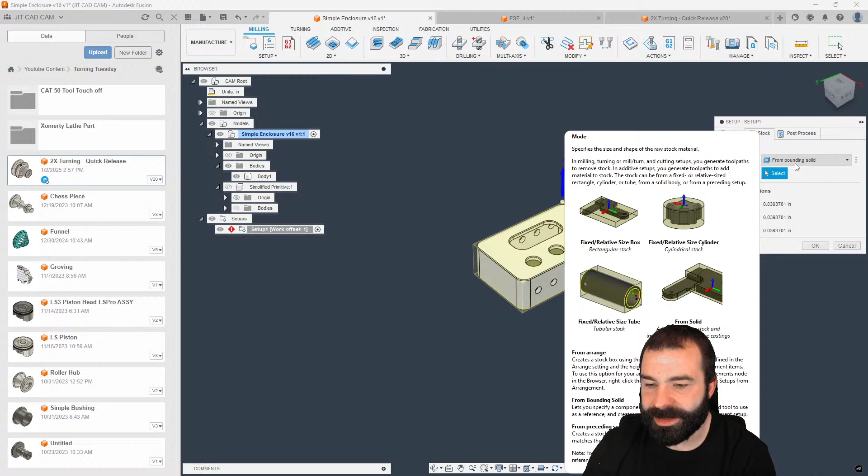What is it that they... give you info? Nope. Lets you specify a component created with the bounding solid tool. Create a stock that machine. Okay, hold on. Let you specify a component created with the bounding solid tool. What is the bounding solid tool? There's something new that we don't know about here?

Yeah, I selected it. Guess that didn't do anything. Are we missing something? I'm always missing something. Is this why you guys come here, to watch me completely screw things up? I feel like it is.

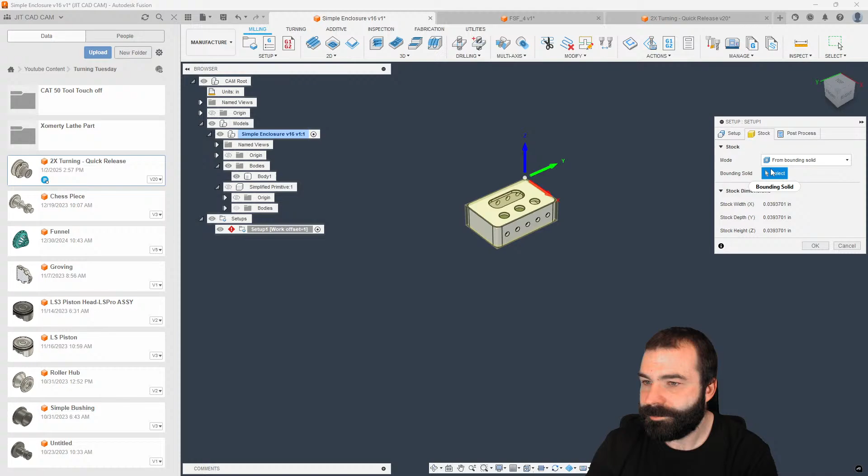Is it in the design side? In boundary? Let's go back here, hold on. Am I crazy?

Component created with the bounding solid tool. Is this some crazy crap where you got to do manufacturing model? I think you're right. Oh, man.

Create manufacturing model. All right. Enter manufacturing model. You don't need the simplify part. Oh, man. Why do I feel like... Oh.

Actually, you know what? If this works the way I'm thinking, it's going to be a good time. It's actually going to be beneficial if I can find it.

Wait, am I crazy? Wait, okay, hold on. Create. Oh, we don't want to import.

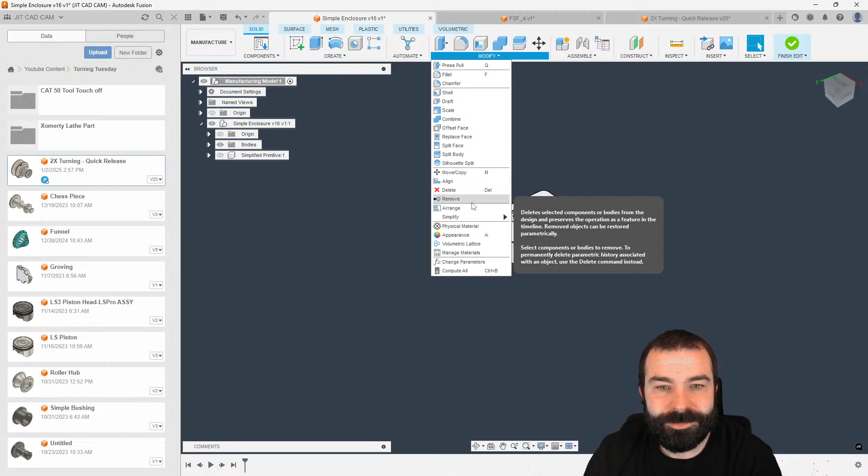I want to insert. Hold on here. Go back.

I'm crazy, right? One day we needed Autodesk to show up. Bounding solid. I'm crazy, crazy as can be.

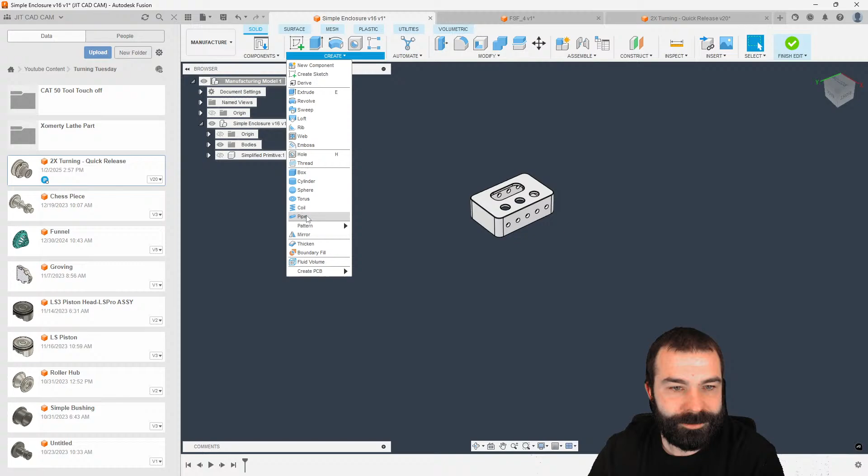Yeah, we don't have... that ain't gonna work. Anybody else figured out? Going once, going twice?

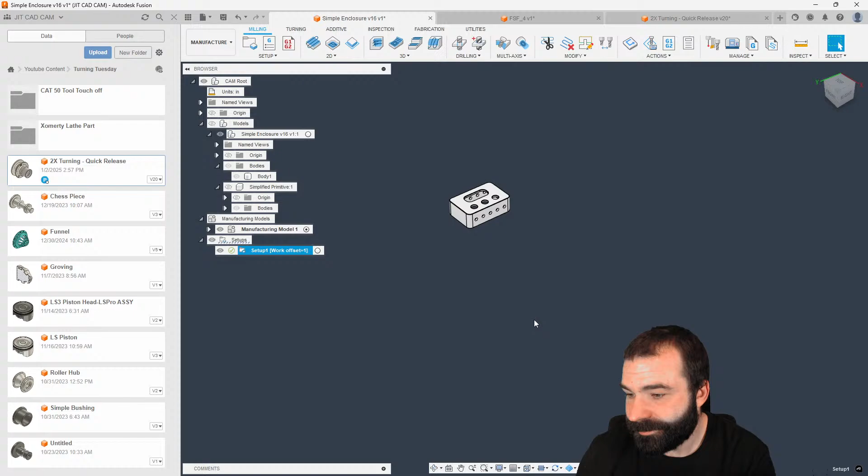So they were using Machine Sim. So if I go back to manufacturer here, and their Machine Sim, it's not because I'm an insider. Is that in everybody's version?

I don't have the insider installed. That's the thing, I've never installed the insider version. I signed up, which I tell you guys, if you guys ever want to see really cool shit happening in Fusion, go sign up for the insider program. You get access to like the forum where all the cool stuff is happening. You get to help shape the product, right?

I avoid it because I use the stable version so that when people have problems with their version, we have matching versions, right? But yeah, I guess everybody has it in their Fusion. I don't know what's going on over there. Be cool to see where it goes.

Hopefully, knock on wood, the way I was thinking, I think some of you are thinking this way too, is we can finally reference the part possibly across manufacturer models or something, right? Like something crazy, because that's another problem in Fusion, is I would use manufacturing model if I could reference my part across multiple manufacturer models, right? From setup 1 to setup 2, and then my continuous rest machining would work, right?

Help shape the products. Yeah, I mean, there is a lot of complaining. I laugh every time I open up Facebook and somebody out there has posted about some new problem with Fusion, right?

Like, this is a good one. I'll show you guys this one. I got to see if I can force it here. So let's do this. Like I was saying, it was with machine simulation and I want to break one of these. So we're going to break one of these today. Select this machine.

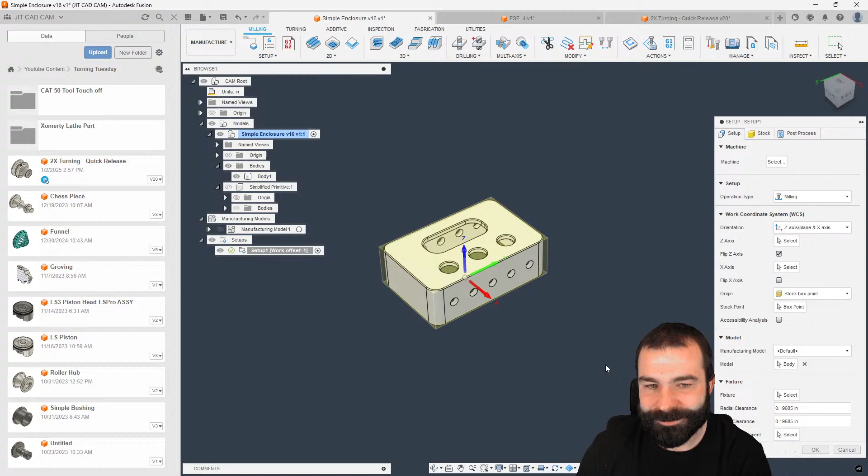I had to Google search this one because I was laughing super hard at it. So, all right, let's move this up. Maybe it is still broken on this part to start with, but here's my machine, here's my part. And if I was to do a facing cycle, right?

Notice how mine calculates, right? Now, the problem is the calculation was not happening. And I'm going to see if I can intentionally break this machine. So give me a hot minute, guys.

We're going to edit this machine in Builder. And what was happening is when you set up your machine, you now have this ability to select a head, right? As you can see, this could be my Z-axis. And I think this model was built way too well, so let's see if we can break this out a little bit.

Okay, so we have a couple of pieces in the head. Hold on here, what do we got going on? 1, 2, 3. Okay, so check this out. So this is our spindle, right? I'm not going to rename it, but you guys can see that that's our spindle.

So let's say our Z-axis is these two pieces, right? And now my head is going to be that other piece. Now, I don't think it's going to allow us to do this because this is doing stuff at a component level. Yeah, see, it's trying to grab the entire component.

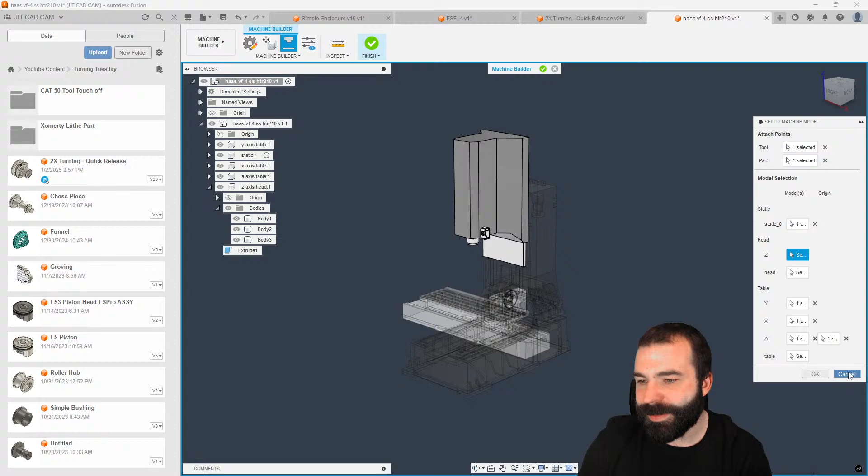So we may really have to go deep on breaking. But what was happening is, get that component. Oh, there, oh. And I'm just breaking everything today. You notice how all my stuff's disappearing now when I try to create components? Let's restart this.

It was causing a dilemma inside of Fusion, which was breaking the way that tool was supposed to work, right? There we go, we created a component now. Create all these components. We should be able to now really mess this thing up.

So as you guys can see, we have our Z-axis selection, which is not going to be that guy, it's going to be these two. And then my head selection is going to be this guy. Let's go ahead and do that. We're going to complete out this machine.

And then as you're going to see, we are now going to require bringing in the new version of this machine. I wonder if it's going to do it. Probably not, they might have fixed it by now. There it is. No, so I forced it. You guys are seeing this, right?

So it only does it with your facing toolpath. But do you see how it says unknown parameter holder clearance? This was happening to 2 of my customers. And the issue is because you saw me select the head as a component, it's now caused this whole thing to cause problems.

So Chuck, I see your question out there. Is there a way to add a delayed dwell to allow my TSC to fully come online before my machine starts drilling? Yes, there is.

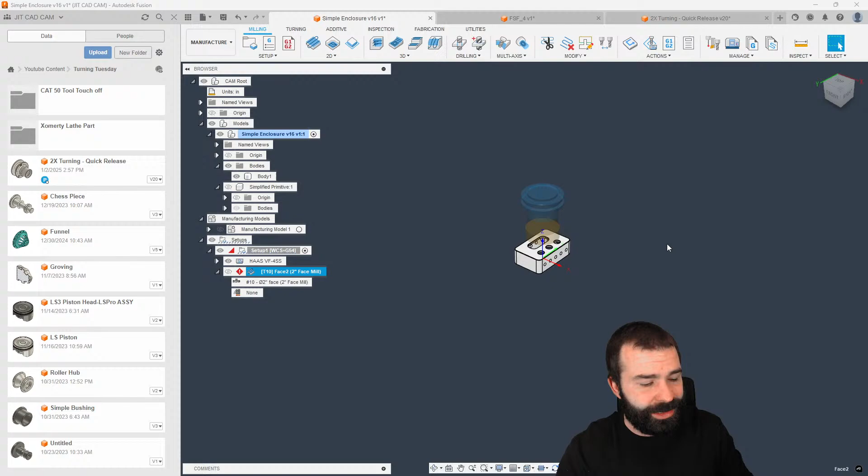But yeah, as you guys see, literally because there was a head selected, which this is what really gets funny, is there is machines in the Fusion library that have the head selected that were causing this problem. And I had to find a post from somebody.

But yeah, it all traces back to that whole selection of the head there causing the problem. All right, Chuck's got a Doosan solution, so let's go ahead and pop this open. So what I'm going to do is go grab the latest and greatest version of the Doosan post. Give me a quick second while I download this.

That's a good idea, Deep Thinker, with another idea to move when the actual coolant code kicks on. That's not a bad idea at all. That's a really easy fix - going to that M8 block, you can see we have set coolant. What I like to do personally is throw a double forward slash in the front. And then at the end I usually put something so I know that I edited it and made that change - I'll put what I did and then maybe JCC for JIT CAD CAM, of course. Now, I know I

canceled this out, but I also need to copy this line of code, right? So again, the good old copy and paste move, because as he was saying, if we turn it on right after we start our spindle, I can come down here to where it says start spindle. Again, I can hit enter. I can paste in set coolant right after it. Oh, I have to hit Control S. Oh, it's done that to me before. File, save.

Give me 1 sec. There we go. And now upon hitting save, you can see that it's automatically jumped up. Again, we still have that G4, but my M8 is now coming on when my spindle turns on. It doesn't come on after my H callout.

Now, this is a bit dangerous because I hear this argument on both sides. One, if I was using through spindle coolant, yes, turning it on after my spindle turns on is an amazing thing. Now, a lot of people complain, and I think this post processor shouldn't have it this way - they want the actual coolant to turn on where we originally had it. So that's one thing to keep in mind, that in some cases people want it down when you call your height, so it turns on right above your part, not at the top of Z. So that would be one reason why you may or may not want that.

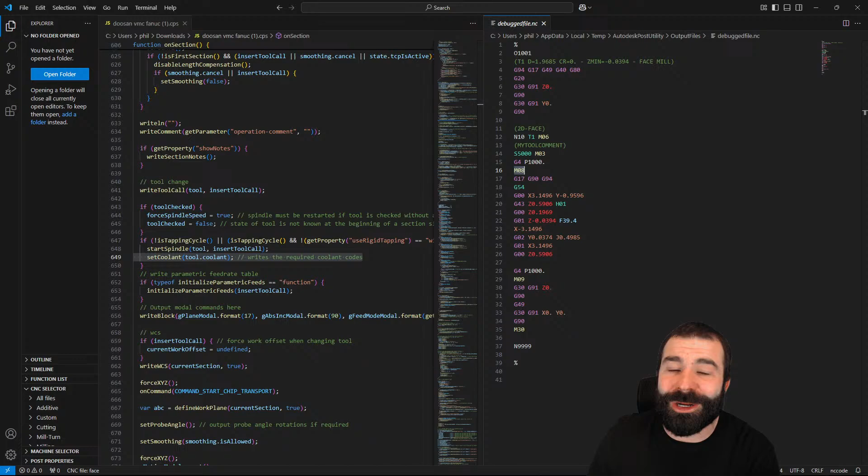I haven't had time to get in there as much as I'd like to be ready for you guys, but it does seem that a lot of you out there are more than willing to help each other, regardless of if you're a master of Fusion, which I don't think I'm anywhere close, to being a novice beginner, of course. So let's look at this.

Again guys, as we jumped away from, notice how I broke it, because I selected the head.

I gotta say, Travis and a few others in there are always there to answer, I think, before I even get a chance. One of these days we'll get Travis on our live. Travis, where are you located again?

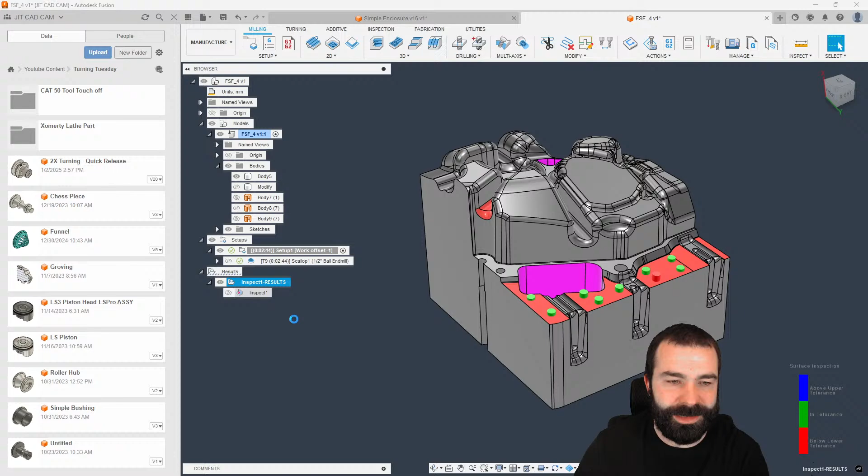So Mads is talking about a lathe. We can take a look at that here in a minute. What I'm doing is I'm cleaning up this file real quick. I was going to do some tool paths on here in the meantime, but let's look at a lathe part, right? What post are you using, Mads, if you don't mind me asking?

We'll give him a few minutes to answer. Meantime, let's go ahead and jump back over. I like this part, I hate this part, but I like this part. I am so glad I don't have to do stuff like this. But let's take a look at it, right?

This is a good part to put up some arguments on, right? So, one beautifully designed part, I don't know who did it. Amazing, all kinds of coolant channels in the back, or vacuum for air, as you can see. Great time, right? So when somebody brings me stuff like this, or a lot of companies out there ask me about mold making in Fusion...

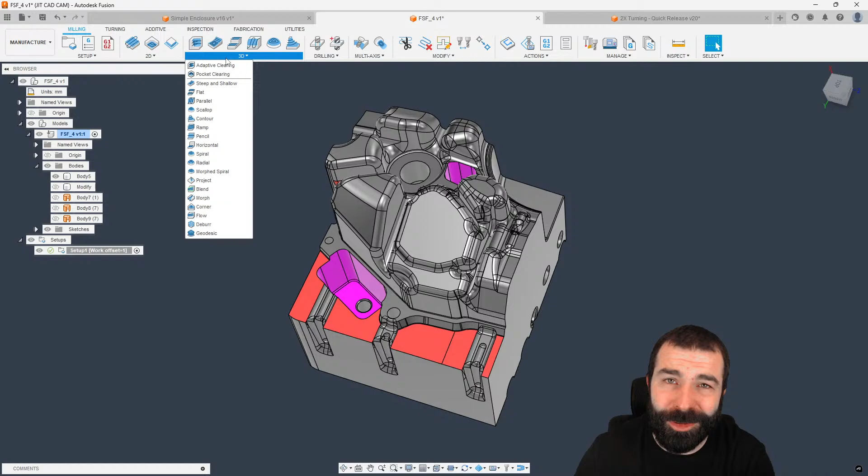There's so much power, but it still comes back to a pretty simple system. We have to rough out our part. And this is the time where I tell most people, you'll always use pocket clearing when it comes to molds over adaptive clearing. The reason for that is because your molds are usually very large in size. That being said, you're going to go in with something like a 1-inch high feed mill or a 2-inch even to start this whole process off.

Now this is a good point for me to point out. A lot of people say face mill, and yes, we all know Fusion does not have insert mills as an option, but I tend to tell people you could also set up your face mills as a bull nose end mill as well, right? So if I was to use like a 1-inch high feed mill, I would actually come in and usually define it as a bull nose end mill. Now if you have a tapered bottom on that tool, that's a whole nother scenario, and it's going to be a little tricky for you to use.

But let's copy this tool over. Let's go ahead and paste this into my VF2. I'm going to make a couple edits to this tool, one of which is a 15 thou radius on this tool is a little small, so let's go up to like a 60. Again, we're going to want that tool to more or less stick out even further.

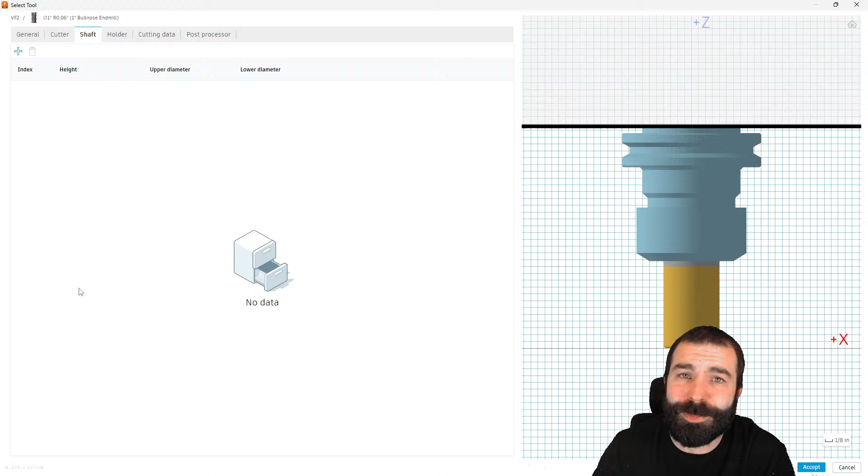Now, again, you could build out the shaft and the holder and everything here, guys, but knowing that that would pretty much be a pretty square tool and I'm not going to ever undercut with it, I would go ahead and say maybe it's 8 inches long, and then our length below holder is going to be somewhere like 6, right? As you can see, I can actually define something very easy when it comes to the profile of the tool.

So with that, the reason why I would go pocket clearing on something like this is because we're going to use the full width of the tool, and then we're going to do a maximum roughing step down. So in this case, we did give that a 60 thou radius on there, so I would do less than a 60 thou radius. Maybe we do like 0.05.

And then I'm going to type in IN, because I believe that somebody got millimeters wrong on this part and I've yet to change it. But as you can see, Fusion has accommodated for me to do millimeter machining with inch tooling by using IN or IMM. And with that, what you're going to see is this is going to very quickly go out and start to rough out this part. Now let's go ahead and take a look at why I'm getting an error.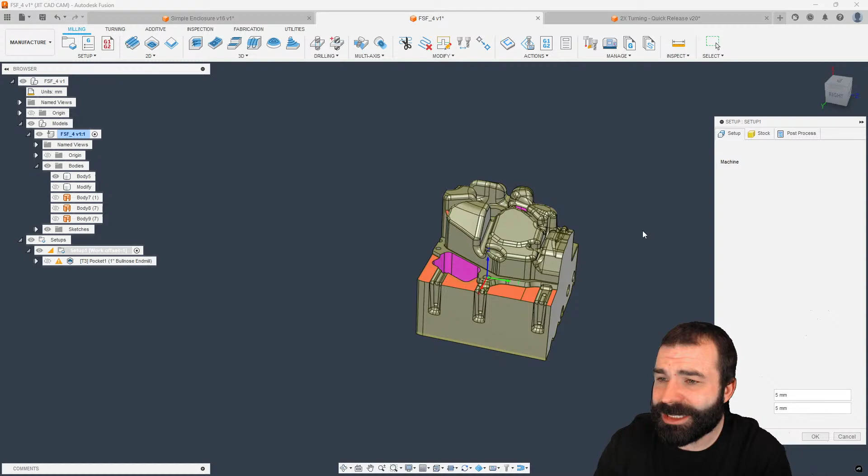So we are getting an error, bounding box tool on center. Rest machining is actually screwing us here, guys. And the reason why rest machining is messing with us is I changed things up, and I'm using a from-solid when that should be a fixed size box, of course. That's why we are having that problem.

We went back and forth between two items, but as you're seeing, we're now roughing out this part using that actual high feed mill. Now I do need to make a few changes because I'd like this to have no boundary, which would allow machining in and out of that part without concerns to the containment of our stock, of course.

Corrado, nice to see you out there. Mads, let's go ahead and look at what you're trying to do.

As you guys can see, we're now machining way down this part, but we are also starting from outside our stock. Let's get our linking moves turned off so we can see a little bit more of how clean that tool path is getting. As we're starting from the outside of our stock and working our way in, that makes it much easier to rough out this part in particular.

Another tip, guys: F7 here turns your tool path on and off, so I don't need to go into simulation to really see what is and isn't machined yet. I can actually do that in real time. So we're going to go ahead and get back here.

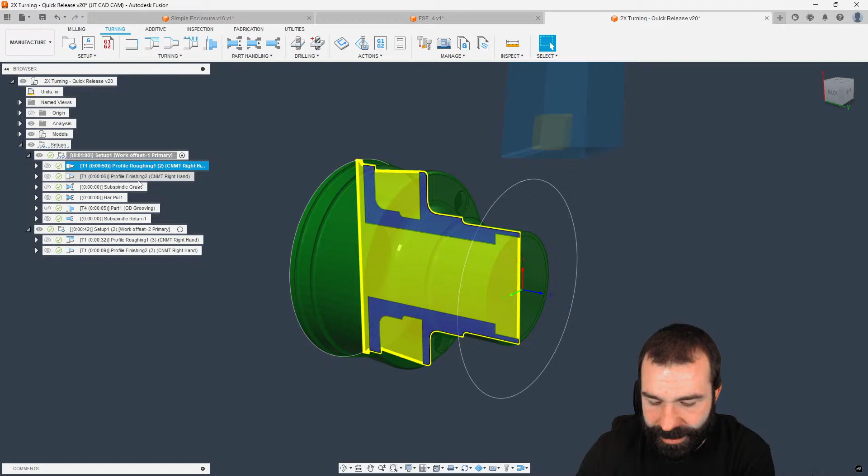He was talking about a roughing profile on a tool path. I need to use F7 to turn on that tool path, of course. We're going to go ahead and post-process this with, looks like he has a Haas machine, is what he was saying.

So let's go into our lovely post-processors here, and we're going to go ahead and grab a Haas post again, turning. Let's just say he was running something like an ST15. We're going to copy that over to somewhere I could delete it later. With that, when we post this out, his concern is being able to use G41 and G42 canned cycles. So what you're seeing here is we're actually getting a G71 canned cycle from what it looks like.

The reason for that is G41 and G42 should have been tool wear, if I'm correct. Now on a roughing cycle inside of Fusion, it's not actually going to do wear compensation. Just so you guys know, whether it be milling or lathe roughing, it's not really going to use cutter comp in any way, shape, or form in his settings. So we can add that, it's possible to be added, but I don't usually recommend it unless you fully need it.

Bogdan, did you see that? Yeah, it calculated fast, and I hate to say it guys, I'm not on anything very impressive of a computer. I actually bought this computer for $1,300 on a killer deal a couple of months ago, and it does do quite a lot very quick.

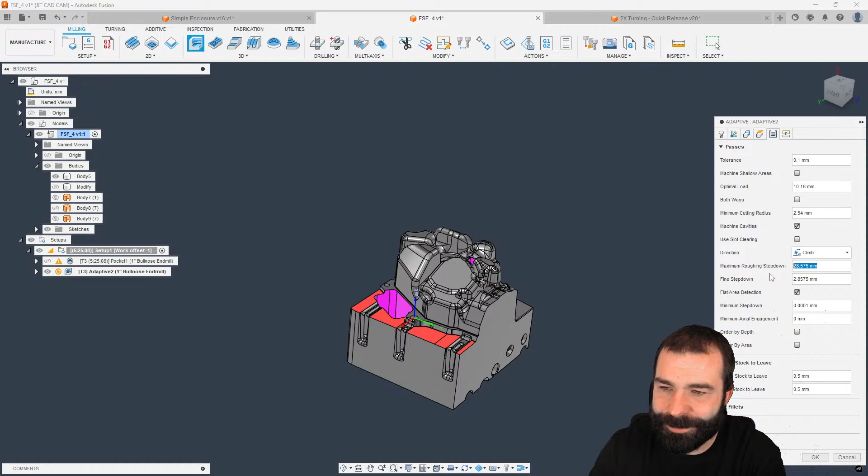But it's kind of a trick too, because if you were to do that same thing as you guys saw here with adaptive clearing, remember this is going to take a maximum step down and then an X amount of step over. The reason why that calculated out so fast, as you saw, hold on, I'm going to have to turn off rest machining, I already know it.

We want to do, of course, you can't just turn it off anymore, can you? Here we go.

So the reason why it goes so fast is the data points that reside inside the toolpath are used. So again, you're talking about toolpaths that are 3 megabytes here, and this thing is just starting to build itself out and step up a lot more.

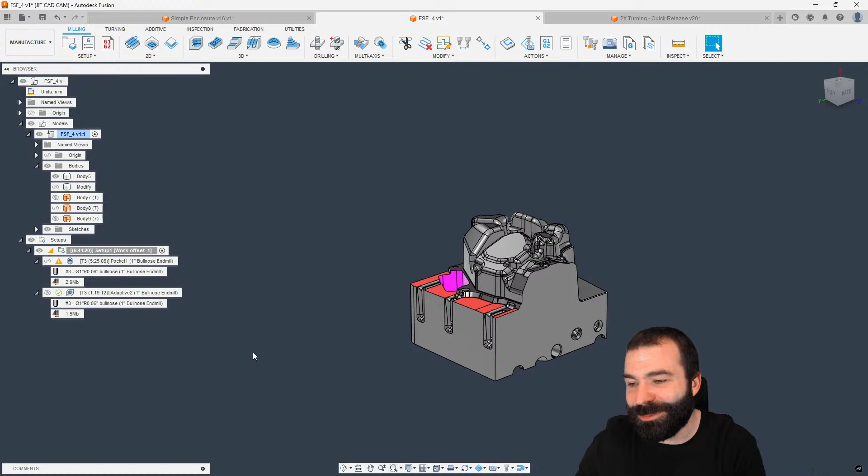Travis wants to know my secret to why my settings are so fast. There's actually, when I get into finishing toolpaths, there is some changing, and I'll show you guys that here. But I just wanted to show you it did calculate fast, and you could actually look at these stats if you're a nerd like me. You can look at our log, we can see this took 16 seconds. Again, we could look at the log on this toolpath, this took 8 seconds, but it still usually comes down to the number of points being calculated, and you could actually turn on your points to see.

So if I go into my toolpath and say points, every one of those black dots you're seeing is a change in direction. So again, with this roughing strategy, although we're not taking as deep of cuts, adaptive clearing is much more arcy. I say arcy because as you come around these corners, it's making a lot of little segment changes as it makes those moves.

So if we look at something more like pocket clearing, not the best of examples, but if you look at this first pass up here at the top, it's a very long straight line. Every time we arc into that straight line, you're going to have a point because at some point you're ending the curve and going back straight. But that's where you'll see a very fast calculation. Pocket clearing always calculates faster.

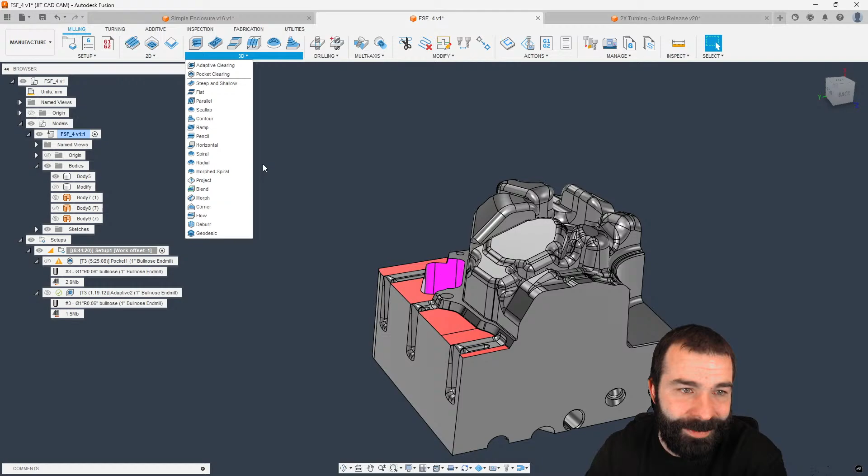Now, some of the settings Travis is actually pointing at is if I go to something like a scallop toolpath, this is where we can get out our lovely ball end mill. With that, if I look at my passes tab, I'm going to switch back to the freedom units, give me a sec here, guys. Switch back over to inch. All right, let's make that scallop toolpath.

Again, we'll swap back out to a half inch ball end mill. Now if I leave my tolerancing set very tightly inside of Fusion, four tenths - I've done videos on tolerancing and smoothing and all that - what that's saying is try to maintain 4/10 of what my model is. So what you're going to see is this will take just a few seconds, and there's a reason I picked scallop, because scallop actually calculates very, very quick.

But again, you have a million dots in here. Every one of these dots is a change in directional move. This part, just going on a limb, it's probably a sheet metal stamping die, or it might be plastic injection molding. It's got a lot of room to play - I don't need to maintain 4/10 against the surface, or what would actually be a triangulated mesh on this part. So I can actually speed up calculation.

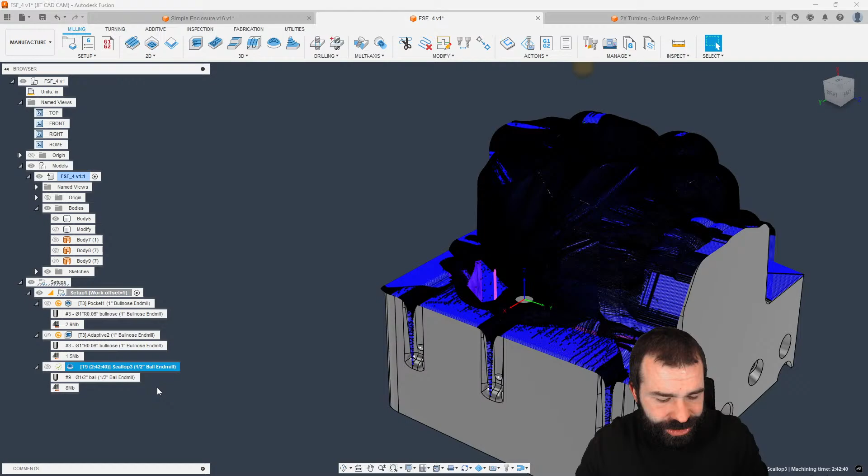So I'm going to hit Control D and duplicate by increasing my tolerance. There's two sides of this: the higher your tolerance is, the looser you're allowing that toolpath to follow the model. So if I go from 4/10 to 4 thou, that's 10 times greater tolerance - does that mean my part is now plus or minus 4? No, technically it means we're within 4 thou of maintaining a lot of these surfaces.

And what you're going to notice is, one, we need to change our step over to match. So give me one second here. Go back. That was 20. And this should also... Nope. Let it recalculate. Come on.

So, again, as you're seeing, we're seeing almost a reduction of 75%-ish. Now, again, we're not necessarily machining this part much looser than what it normally is. We're just allowing the tolerancing of the actual path being calculated to give it a little bit more leniency on how close it needs to be to the model.

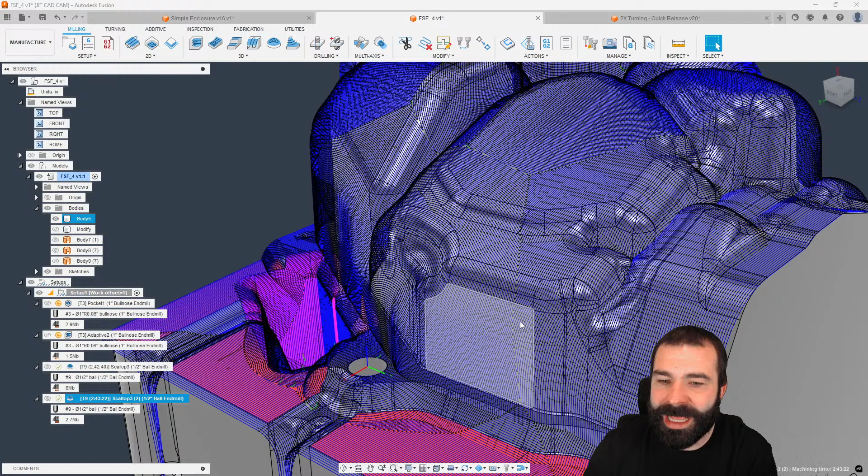Now, smoothing is a little bit different than that. Smoothing is about how much you're allowing those points to deviate even more. I think a lot of people mistake the concept that smoothing is going to make everything perfect and smooth - it's not. What it's trying to do is reduce points within a tolerance, so that your toolpath, if you have two separate arcs coming into each other like an M shape, can move that point to make one continuous arc.

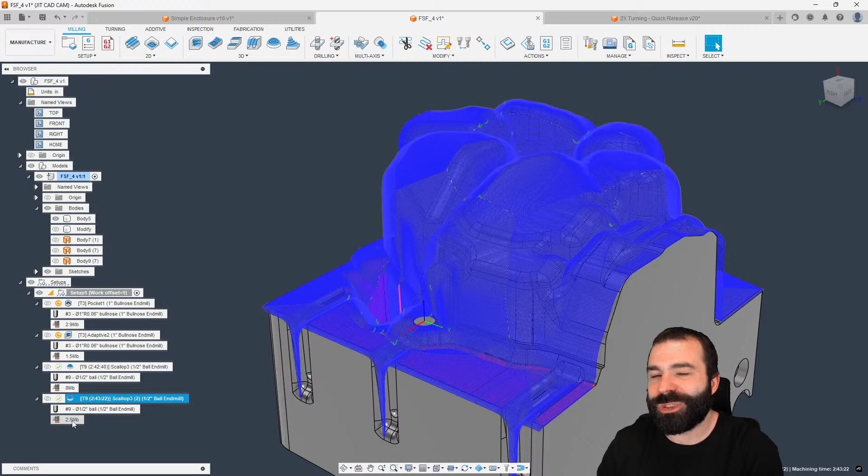So again, if we add smoothing in, sometimes you get an even greater reduction in your toolpath, and other times not so much, depending. So you could actually keep a very tight tolerance and then a looser smoothing. Notice how we've only got a reduction of another 0.2 here in data points - you're not seeing a real fine or crazy adjustment.

But if we take that other toolpath, again you guys are seeing me duplicate it. And now at a much tighter tolerance, we went ahead and added smoothing in again, and we could actually bump smoothing up a ways.

What you're again going to notice is we reduce our data points, but what really is going to happen is we're allowing that tool path much more lenience from point to point versus point on model. So even with a large amount of smoothing, we're not getting a ton of difference. When we look at somewhere like these little lines, notice how we're finally getting a longer arc before we get back into a bunch of steps. When we look at the path we did prior, that would tighten up where you would have more data points across it.

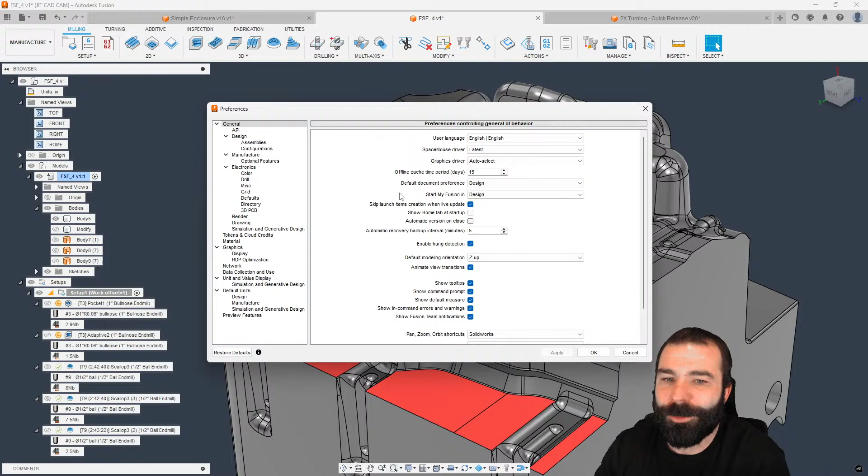The other one I tend to recommend people change is, where is it... it's actually up here in general now, your graphics driver. So you have DirectX 9, DirectX 11, and then you have OpenGL. Now I left mine on auto select. However, in the past, I've used forcing DirectX 11 if yours has it, or if you're using more of a professional card, getting into the weird Quadro cards, sometimes OpenGL will help you. But me personally, on an older machine, based on your graphics setting, I tend to put mine to better performance.

I could go better display. I don't think I'm going to see a difference, but I'm on a 1080p display and YouTube limits me to live streaming at 1080, so there's no reason for me to get better. I will say, because I do have a laptop with a 1440 screen, when I look at that thing, it looks so beautiful to me. It's hard to go back to 1080. But yeah, I don't think there's a lot of changes that I make there.

Any other questions outside of that from anybody and everybody? We have 5 minutes left. I can't believe you guys made me talk this whole time and stay. I know what I do need to do now though, is my wife can't argue with the fact that somebody just bought me a ton of beer I got to go buy.

Yeah, I mean, your Intel i9, I assume you probably got like a 4070 GPU in there. I would leave it on auto. I haven't had any problems.

It didn't say it was beer. It's going to be beer, one way or another.

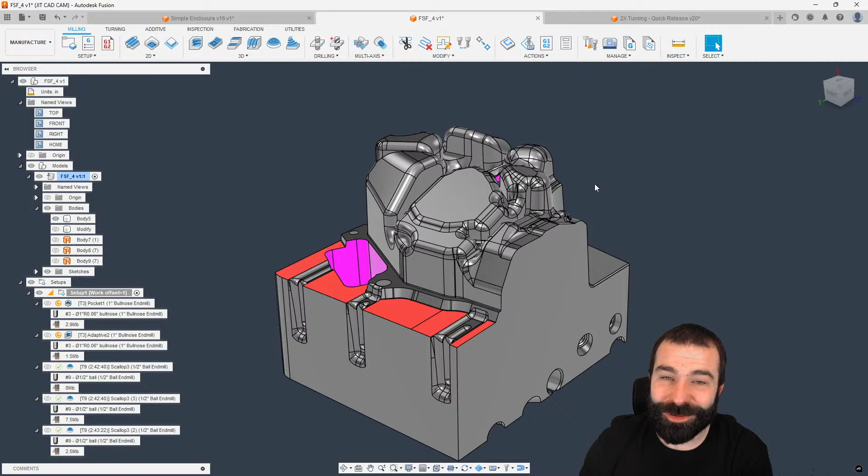For a lot of you out there, I see a lot of people ask that question. I pulled up the specs of my system. You don't need to go out and buy the latest and greatest. Don't ever think that. I tell all my customers, unless you're doing 5-axis all day every day, you don't need to even get to this tier of machine.

A good gaming laptop, and I suggest laptops so you can move around your shop, or a good gaming desktop that you could actually buy at Walmart. Now I'm going to get hate for that comment. The reason I tell you guys to buy one from Walmart is because when you break it by accident, you could just go buy another one. But a year from now, it's going to be obsolete anyways, so why put up the battle?

I've always told people that you don't know your car's slow until you drive something faster. So for most of you, you're probably more than adequately okay. In my case, I'm streaming video while running Fusion and calculating toolpath, so I put a little extra money behind it. I also have to troubleshoot 5-axis toolpaths, which are always fun, and faster calculations always help.

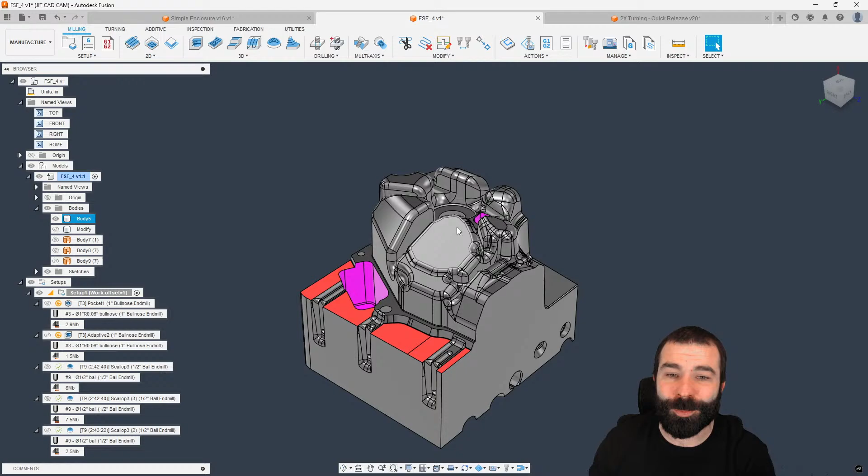Yeah, 100%, Travis is correct. He said he used to use a Best Buy computer for a while until he really got into big, heavy setups. Again, based on this part I have in front of me, if this was something I'm doing all day every day, sure, spend the $1,500 like I did, get something much more to the higher end. But if you're not, you're really not going to notice. Like 4 or 5 second differences in toolpaths, it adds up over time, but it's not that detrimental.

Again, if I was programming parts like this, as you guys saw, first things first I would crank up my actual smoothing setting or my tolerancing on my 3D toolpaths. And then when I get the path I like, I would go ahead and change it back to a little tighter settings.